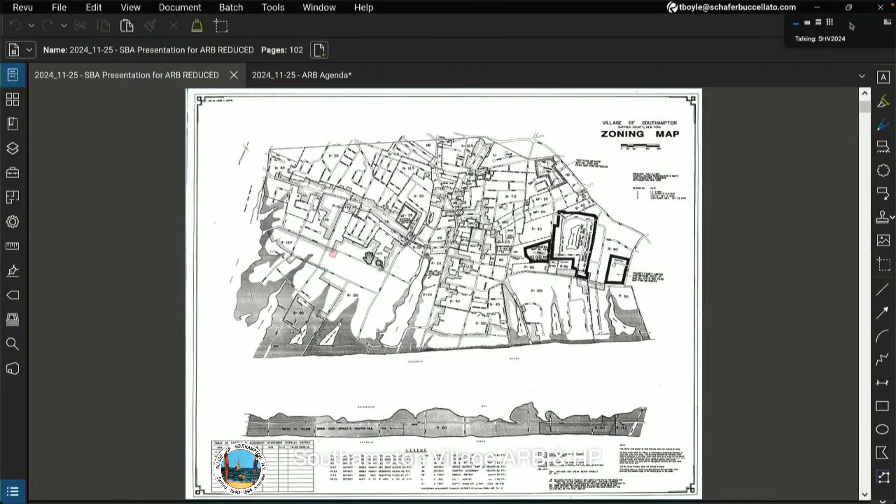So the existing home at 270 Ox Pasture Road is located within the Historic Estates section of the Village of Southampton and has been designated as a contributing resource in the Southampton Village Historic District since 1988. The existing house was built around 1910 as part of Southampton's early summer colony development.

The original 4-acre property was subsequently subdivided by a subsequent owner, shortening the depth of the property at the rear side. And that can also be seen in subsequent aerial mapping in 1960.

The home retains generous front and side yard setbacks, but as noted, the original parcel was subdivided, so it's now about 2.7 acres of the original 4. This was done sometime between 1932 and 1950, we think.

So the house now appears to sit toward the rear of the property, and consequently, there was a later kitchen addition or a previously altered kitchen area that actually straddles the amended rear side property setback.

And similarly, the existing non-conforming 2-car garage, which appeared in the survey of the property in 1950, as you can see here, that also partially falls outside the accessory building setback boundaries. So both of these elements represent pre-existing non-conforming conditions.

The house is described in the 1979 New York State Building Structure Inventory Blue Form as a 3-bay, 2.5-story hip roof Queen Anne house. And it maintains much of its architectural integrity, including asymmetrical massing, deep overhanging eaves and returns.

Variegated and decorative shingle siding and string courses that define each story, and multiple window types - all of these things are characteristic of the late Queen Anne Revival style.

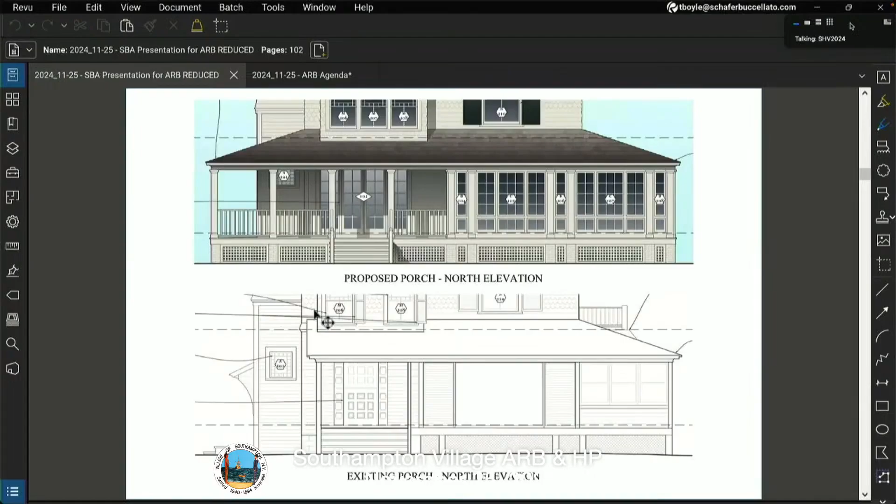We are also proposing to reduce the depth of the rear deck off the kitchen, and also the number of steps, as this deck will now connect to a slightly raised garden designed by Miranda Brooks, which we'll describe again later in the presentation.

So you can see both front and side. Here's the side. You can see at the bottom, that is the depth and the height of that existing deck off the kitchen. We're proposing to shorten it considerably and also eliminate a few of the steps by landing it on a raised garden.

I'm confused. So you're putting on an extension to the enclosed porch, is that correct? Yes, we are extending the enclosed portion of the porch.

Right. Do you want us to go back? Could you tell me, in relation to the already enclosed porch, what is it equal to? Let's say it's a bay and a half. So if you kind of lined up, is the below what's there now?

Yes, and this bay here on the right, which has the plate glass in the middle, projects from the face of the house. So in all, if we were to draw a straight line, the existing front porch across that bay, we're not extending, we're filling in and extending the house by a bit and just connecting that interior space. We feel like this solution is a little more visually coherent, and it affords them better visual access to the property.

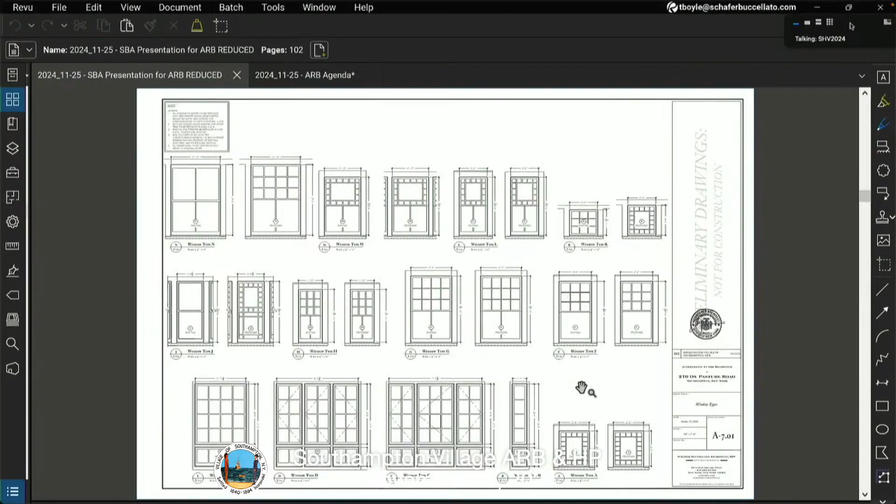So you can see from our drawings here where we have original windows and what we would propose in their place. Any one of these 3 strategies can be achieved by Riley, but we of course want the board's feedback to understand whether there are any that are immediately a disadvantage in your view.

Okay, we'll also show you a picture of a project that Riley Windows has completed recently. I think we trust that they know what they're doing. I don't think we need to look at windows from another project. The colored glass—yeah, we've figured out a strategy with them to achieve that.

Okay, and then, as with previous alterations to the house where original windows have been removed, moved, eliminated, or added, we are also proposing to add a new window at the projecting bay to match those that are flanking it.

So you can see below, the bay has 2 windows in the front. There are actually 2 windows on the side, so it's a bay of 4 windows with one kind of a blank in the middle. We thought to complete the bay, making it a 5-light bay, or 5-window bay, as we're showing on the top.

We're also proposing 2 new dormers, which would be in character with the existing dormers of the house. On the east side, that's the new dormer we're proposing on the 3rd floor to bring more light, and then that's at the 2nd floor on the south side.

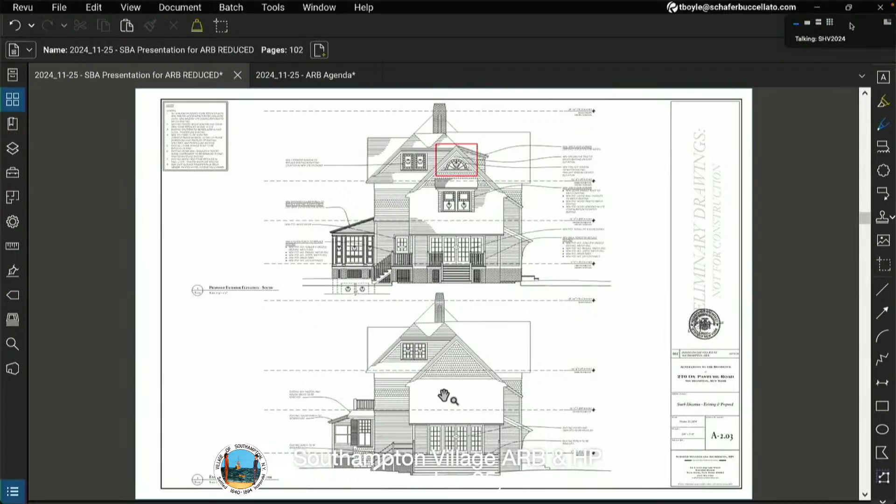Being in that garden and looking up at the house, you see new additions which are sensitive to the original. We've been working alongside Miranda Brooks Landscape Design as they develop the landscape, and although Miranda could not be with us tonight, she's provided us with the following points to share with the board. Their approach to the landscape was designed or guided by...

Before we go down that path, let's - you wanna talk about the house? I think you've got new structures and you've got a historic structure. Why don't we bifurcate that out for a minute? Let's just start with the existing structure. That sounds fine.

Board members need to - I will tell you one thing we're going to do is I'm gonna ask Zach to take a look at the house and tell us what he might know about it, just because it's a 1910 house and you're in a historic district. But board members...

It's an awful lot to take in. I wanna say thank you for not trying to demolish the house or change it greatly, but I would hope that you would use whatever is there. I think sometimes the original windows can be used. So where we can, we need to make sure we can achieve the impact rating. And if we can achieve that through rated storm windows applied during storms or seasonally, I think we need a good understanding of how we can achieve the energy efficiency as well, so you're not behind a storm panel all year round. But you're right, we would want to maintain as many of those original windows as we can, while also meeting the demands of the building codes. But I appreciate that would be our goal as well.

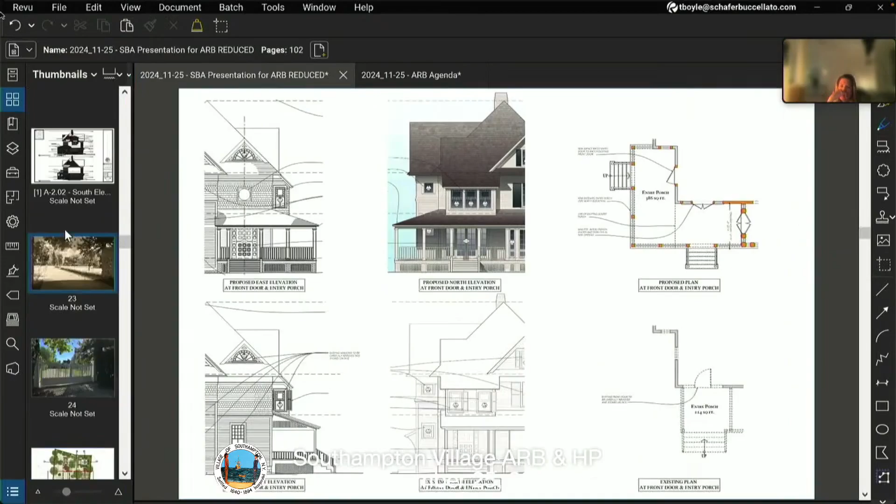So what you'll see from the site plan is that the existing driveway, the driveway opening, apron, and gate are all going to remain, and the existing driveway will also remain. This brings you to the house on the west side. Currently there's a circular drive around a tree, and you come to the north side of the house. So what Miranda is proposing is to bring you along the west side of the house, so it makes sense, at least in our mind, in tying those two ideas together, to enter the house from the east. The glass doors that you see in the position of the original front door are leading to an enclosed hedge garden.

So we're creating some connection between the house and the north. One of the challenges with the side setbacks of this property, having been foreshortened, is that most of the property is to the north. So wanting to take best advantage of those views and the connection from inside the house to the outside on the north is important. It's one of the reasons why we've tried to improve the enclosed porch to the north.

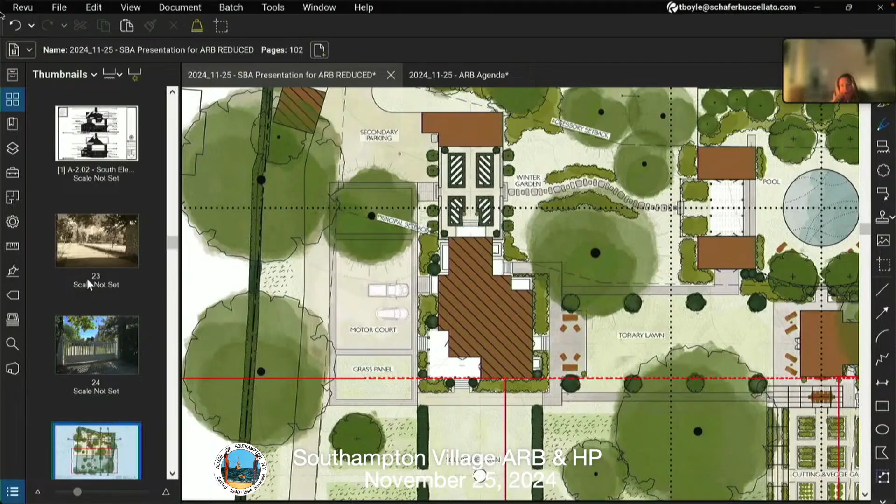As I said, we can just go to the approach here. So the driveway apron and the automatic gate are going to be maintained.

Sorry, it's catching up here. This is again the view of the proposed design. This is the existing gate, and that will remain, and this is the view from the driveway apron.

The driveway again leads to a new motor court flanked by lawn panels, creating a new primary entrance sequence, which is associated with this relocated front door. And then the drive continues to the south.

Let me just go to the site plan. So there's the new receiving area with the flanking lawn panels, but the driveway continues to the south. You can see in the upper left, there's the existing two-car garage, so there's a service court now nestled in the back.

And we're proposing to refurbish if we can. This garage building is in not great condition. We'll refurbish it as much as we can in its footprint, or if we have to, reconstruct it—you'll see elevations of that in a bit.

Tucked behind the existing house is an art studio and maker space, which will be connected to the house by a raised winter garden, which you can see with the parterres there. Pleached trees are going to create a living screen between the garden and that service court, connected by this meandering path.

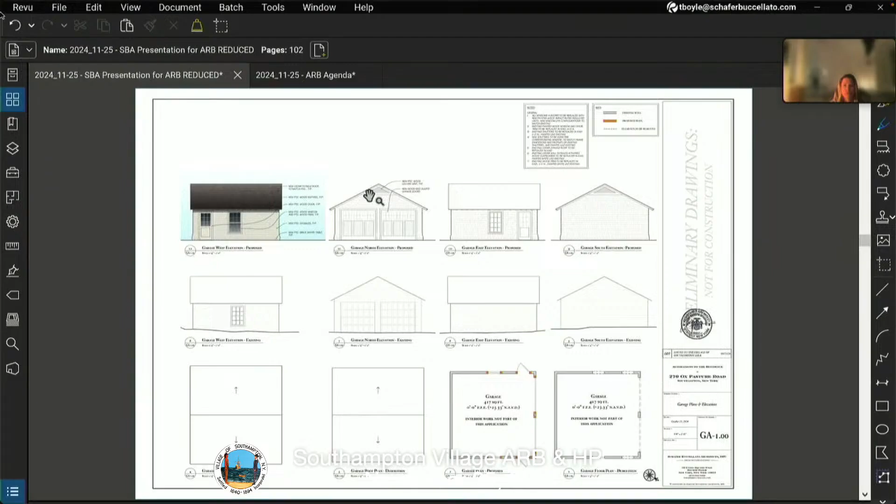And then the art studio is next. Okay, and then we have the gym and the spa. Let's take us through the art studio. Sure, so this one will have shingled siding that will be painted to match the house.

So these two structures, because they're so close together, want to feel made of like materials and finished in like ways. We have double hung windows that are operable on the north and south sides, and also on the west side, and an entry door off of that service court.

And the roof pitches here, I think, are 10 in 12. The main house is 12 in 12, with the Victorian steeper pitch. Here we kept under the 16-foot height limitation and still have a pitched roof. We did the best we could.

And then the gym building, which has a twin, the spa building—these buildings will also be shingle-sided, with natural wood roof material to match the main house. But at this point, we think these two buildings, and also the Folly, are going to be stained or left to weather, so not painted. The brick water table at all of these structures—the gym, the spa, and the Folly—will probably be left unpainted, unfinished. That's the idea at this time, although the art studio will have materials that are again in keeping with the main house.

If you recall, you all approved our plan about a year ago or so. I'm happy to report that the significant upgrades to materials are moving along swimmingly. We replaced all those non-functional windows with new casement windows, and we happily removed that poor quality EIFS, that foam, and have used very beautiful stucco. The front of the house is moving along swimmingly.

In the back, we have two small changes, as happens with existing conditions. Carol Vinci, our architect, can go through it, but we found two things that we'd like to change in the back. Okay, if you'll just take us through them, that would be great.

I'm Carol DeSico Vinci, V-I-N-C-I. As we began working, as with all renovations, we noticed some existing conditions that we wanted to revisit. There's no changes to the front facade, this is the rear facade. We would like to add a second window and combine it with one window that was approved. This is in the area of a stair landing on the second floor. What we realized when we began work was that we really minimized the view to this beautiful rear yard.

I included in the submission for this modification a color Xerox of the old rear facade, so you can see that we took away a view that we had previously, and we didn't intend to do that. So on the second floor, above the French doors that lead out to the rear yard, from the stair hall, instead of one pair of French casements, it's two pairs of French casements. That gives us the view back.

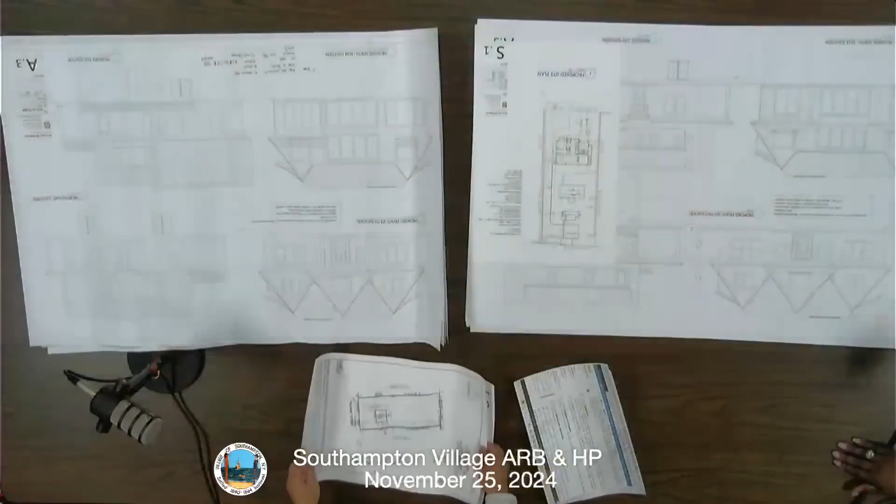So we had a previous meeting, and since then we heard what the board said and made quite a bit of changes. Starting from the back where the windows and doors are, you can see this is a lot of glass, and we did a lot of reductions. We reduced about 130 square feet of glass, so it's like a 25% decrease of the glass area.

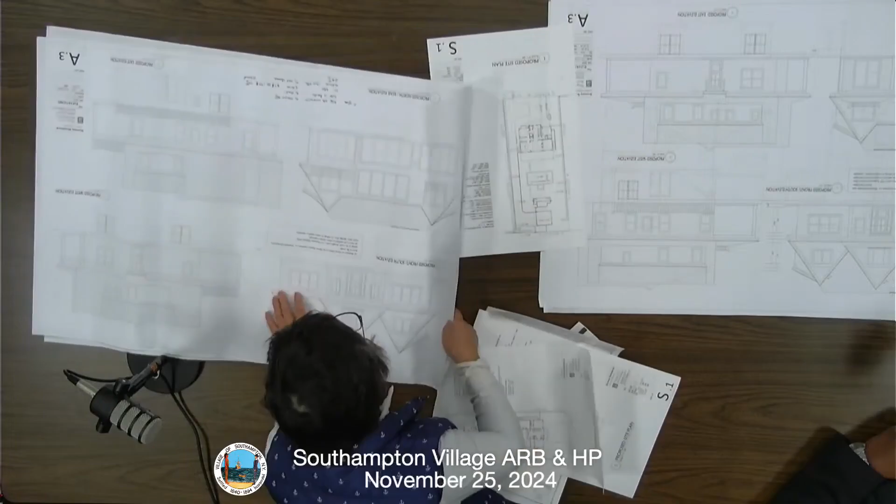That will be the number one thing we did. Number two, the roof line - I think the board was saying there's too much curve, so we turned them into straight lines. And then the columns, instead of 4, we did 2. There's also the square footage reduction of the balcony.

So the balcony right now is all different. Instead of a large balcony, we had them recessed into two smaller ones instead of one large balcony. It's probably easier to see it on the floor plan.

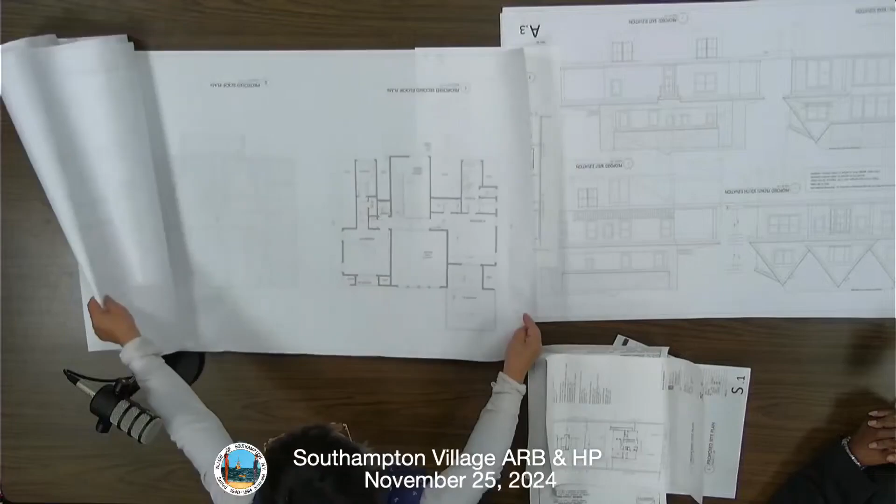And the floor plan would be - this was the original, it's a very large balcony, and then we had a small balcony. You see a tiny little one - 4'7" by 8 foot, 4'9" by 8'7" balcony.

And then we have also changed - sorry, I wrote it upside down - that's about it. Oh, the dentil, we removed the dentil, yes. The front gable, they're gone. Board members, that's the changes we made.

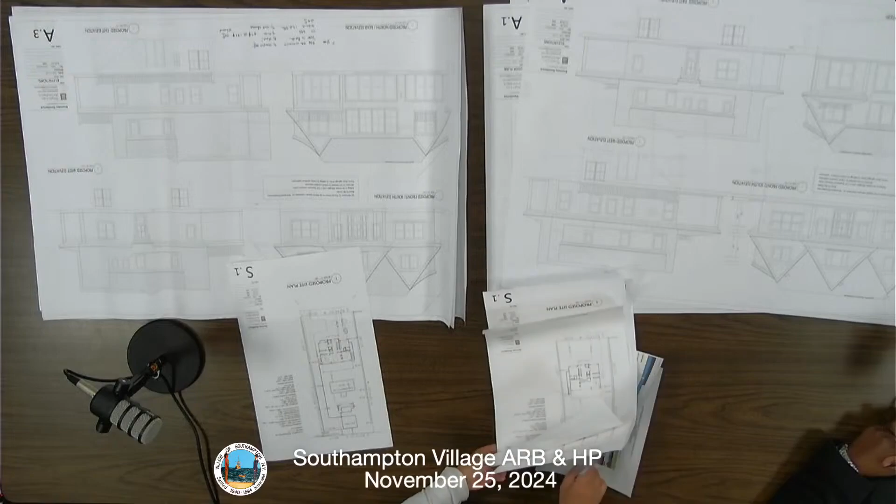Jane? Definitely seems improved. The removal of the dentil, I think, makes it that much more simplistic.

Need any comments? Seems a little... good, repetitive, something cookie cutter. If you look at the original style, there's more variation, I would think, in the proportions and the rhythm of the facade. But I agree that it's improved without the extra decorative dentil.

Susan? I think it's improved. I feel like I've seen this house in the village too many times now though. It seems that this is like standard fare, but I don't know. And it doesn't really relate to the neighborhood, but I guess the neighborhood is changing, so that was my major concern actually. I like the neighborhood, I like how it looks. Okay, and you?

My comment would be, I think when they put it before us last time, they addressed literally every one of the concerns that we put out about the house. Okay. And I think it sits nice in its spot.

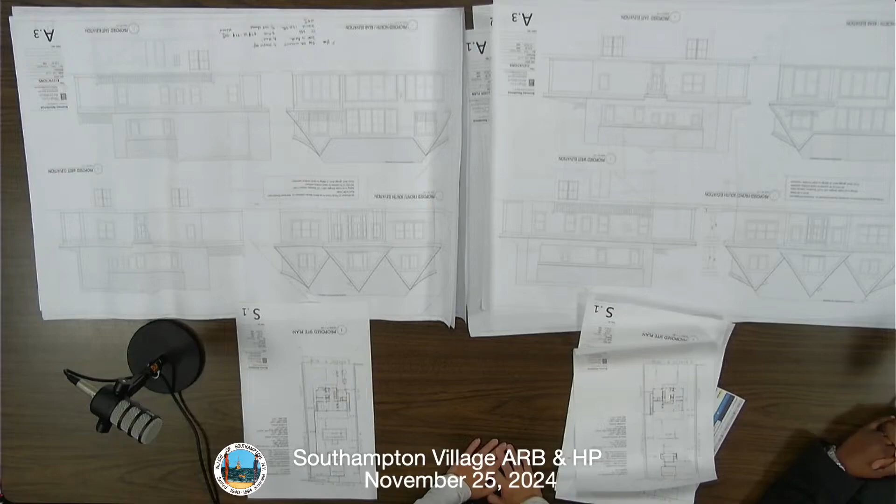Nina? She put her hand up. I'm a nay. Does the record reflect that she voted aye? Aye, okay. Against? You're a nay? Yep, okay, you guys are voting.

And thank you for coming. We like to see homeowners. How long ago was that, a year ago? No, no, the first set of drawings, that's on the drawing date, mid-June. Well, it was 4/21, then 6/6, and then 11/16. So you've had some time there, that's a long time ago. Oh, we filed it in March, but we didn't do the first meeting until June.

Right, okay. Next up is 16 Willis Street for demolition evaluation of existing dwelling. Oh, was that the one we just approved? No, but we just approved it. Yeah, we approved it. Hi.

Hi. Can you introduce yourself and spell your last name, please? My name's Nicole Adams, A-D-A-M-S. I am the architect and agent for 16 Willis Street.

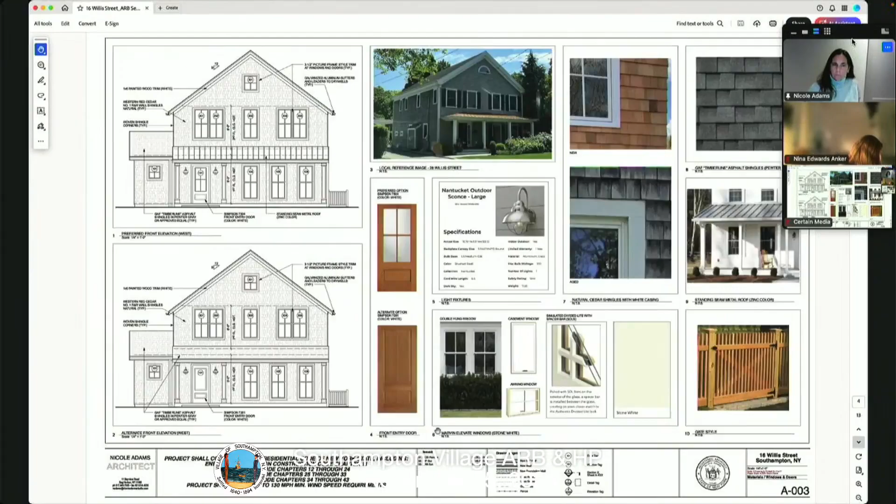Here's what I think: reordering the door to the front and breaking up the completely straight rhythm across the front of the house makes a huge difference, and I think it's more in keeping with what's harmonious to houses you see on the street in Southampton. The two bathroom windows increase your window-to-wall ratio, because it was severely under-fenestrated on that south elevation, so adding those two windows actually improves the house from that perspective. I would agree.

I think what I'm hearing is that the board has a universal love of the asphalt option across the front of the house. So, back to you. We'll take comments from the public. So we're happy to move forward with the asphalt and the windows.

Okay, are there any comments from the public? Oh my God, it's...

Okay, so then I'm going to motion to approve the application for 16 Willis Street based on the drawings stamped into the village November 15, 2024. Is there a second? Second.

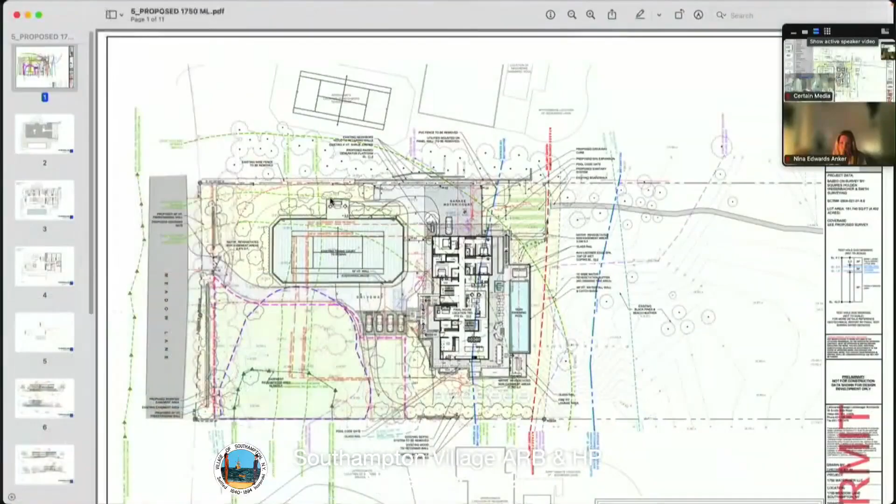Sure, okay, so you want to just bring up the first pages of the presentation. As I mentioned, we're an architectural firm based in Bridgehampton for many years, specializing in waterfront homes. In the last 25 years, we've received more than 60 AIA design awards and have numerous publications. We take our design work very seriously, and I feel like we have an excellent reputation in doing so. The original application, we were in front of the ZBA board for over 2 years, and then working with the ZBA, we ultimately received unanimous approval.

The proposed house, as John mentioned, is approximately almost 200 feet from Meadow Lane, and we're about 360 feet to the crest of the dunes. Then there's another 300 feet from the crest of the dunes to the mean high water mark at the beach, so it's a very long lot. I think as I mentioned, we received letters of support from both neighbors throughout the application process.

I think the merits of the site plan, just to talk a little bit about the site, I know that's less in your purview than the architecture, but the site currently consists of what was determined from all the consultants as a very low-quality wetland, basically a low spot. So the owner's working with the board. LaGuardia Landscape Design has significantly expanded a landscape buffer in the front. The entire property is going to be re-landscaped with native vegetation, but LaGuardia Design worked very closely with the village consultants and other wetland consultants, so those discussions noted that this was a model application in the village for having no irrigated lawn, whereas there currently exists a substantial amount of lawn on the property.

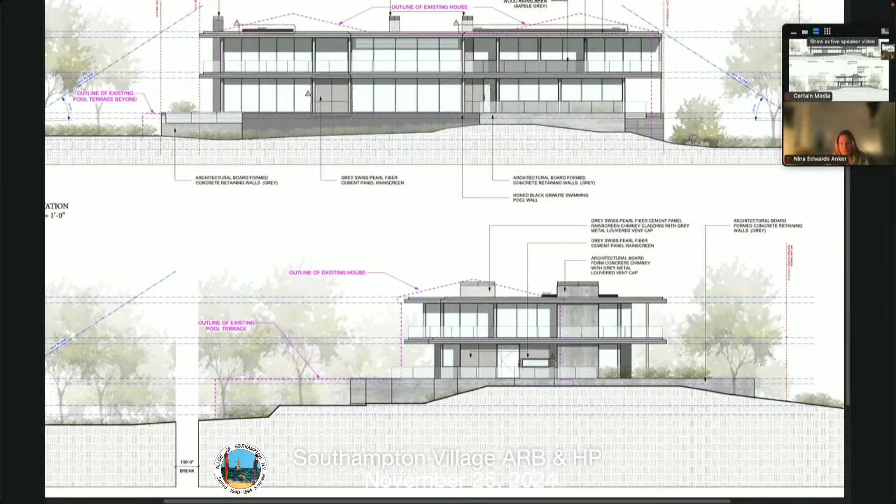There was also discussion going up to the roof plan about the amount of skylight that was potentially visible, and it actually shows up. We revised all of our renderings to show that. So we eliminated a skylight that came down across the hall to the living room.

So we eliminated that whole section of skylight. It's about 50 linear feet by about 5 feet wide of skylight that was coming down, and there was a comment that it may be visible from the front of the house, at least if you're in the front yard. So we eliminated that.

There still is the skylight. The house is a double-loaded corridor with bedrooms on each side. So we kept a portion of the skylight there, but it's actually not visible from the street because it's in a corridor. When you look at the plan, you have a series of bedrooms on both sides.

And that's actually the extent of the changes there. We revised the renderings, and we included some night renderings that Frank can bring up on the screen.

The material palette is the same: we're using weathered Sapele mahogany, FSC certified, which will weather to a natural gray, and a cement panel which is very high quality—not like some other more industrial ones out there. This is called Swisspearl, a very durable, low-maintenance matte gray panel.

For the pavers, we're proposing Madras gray limestone pavers, a light, innocuous gray. And for the sides of the planters as you enter the house, we're using a textured board form, which has a relief, still a neutral gray, but with the relief of the board within the form.

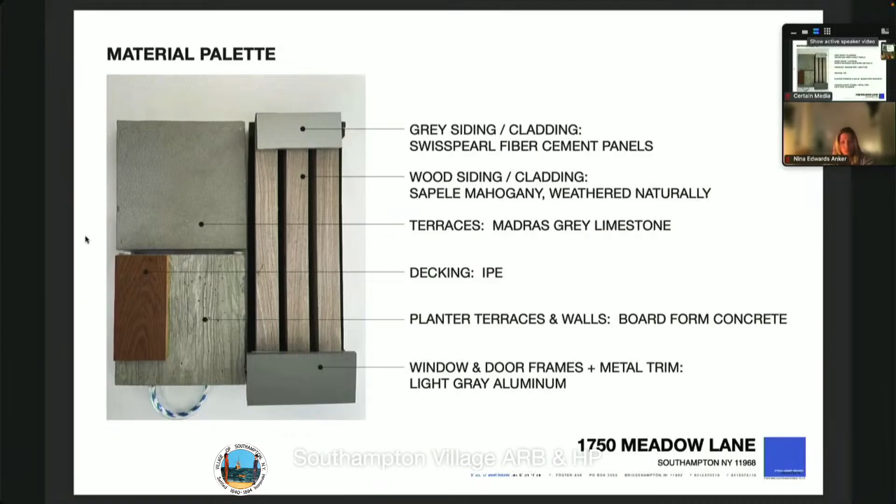We revised the renderings to show these changes, and we included some night renderings per the request of the board at the last meeting. Yes, I see. Thank you.

As you see from the bottom rendering, that's taken from approximately the mean high water, a little above that—it's a bit lower when you're down there, but that's basically the foot of the first dune. So the entire first floor pool area, everything at ground level, even after it's elevated per FEMA requirements, is not visible.

If you want to go to the next one. From the street, one thing we mentioned before—that left view—is once you come in the driveway, it curves around this revegetated native landscape. So going down Meadow Lane, you won't actually be looking down the driveway; it'll be screened by a native vegetated grove. That's taken right inside the driveway.

And I mentioned before about the materials. We're proposing a very high performance glass called SN68, which has a light transmittance of 70, so it's a 30% reduction over clear glass.

In terms of environmental components, we're proposing a closed loop geothermal system. There'll be 25 kilowatts of solar power on the roof—that'll be flat, so it won't be visible. There's also a high performance insulation package and a high performance glass package, as I mentioned.

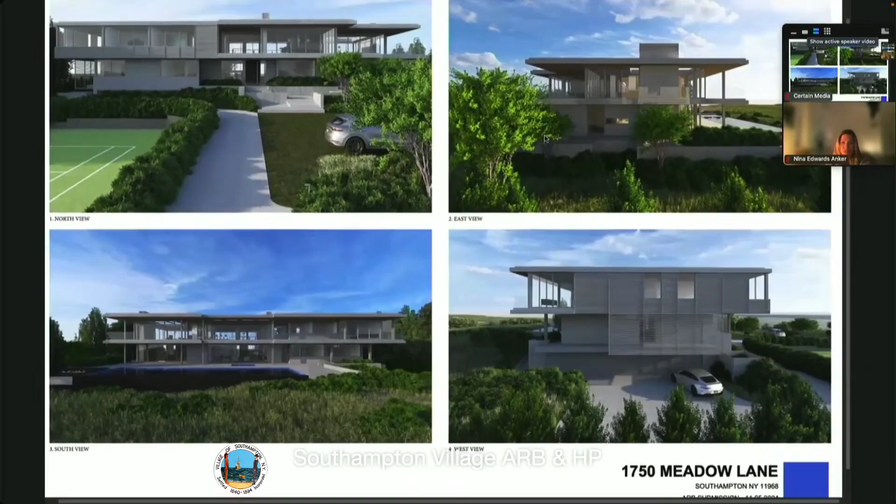We're also proposing wood ceilings, which we thought, in addition to cutting down light transmittance through the glass, would reduce any reflectivity. Yep, they'll absorb it—that'd be great.

Nina, let's start with you. Can you go back to the daytime, the elevations, the front? To 2D elevations.

I think it's improved in terms of the rendering. There was one that I feel is greatly improved. I think you made it more like a half, so it seems like it's more broken up into the two volumes in the north view.

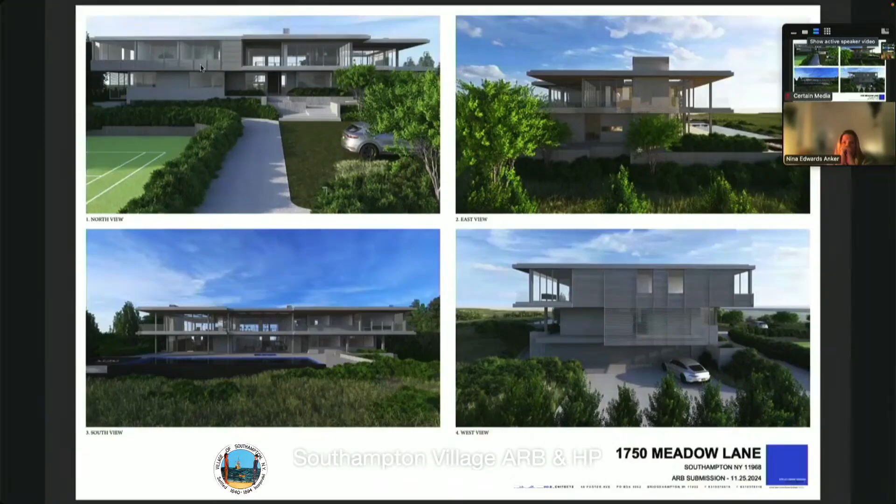Let's get there for you. And I think the east and the west views I've always found those fine. The view facing the beach to the south still seems massive, and not broken up. We see so many of those along the beach, these big glass boxes, rectangles.

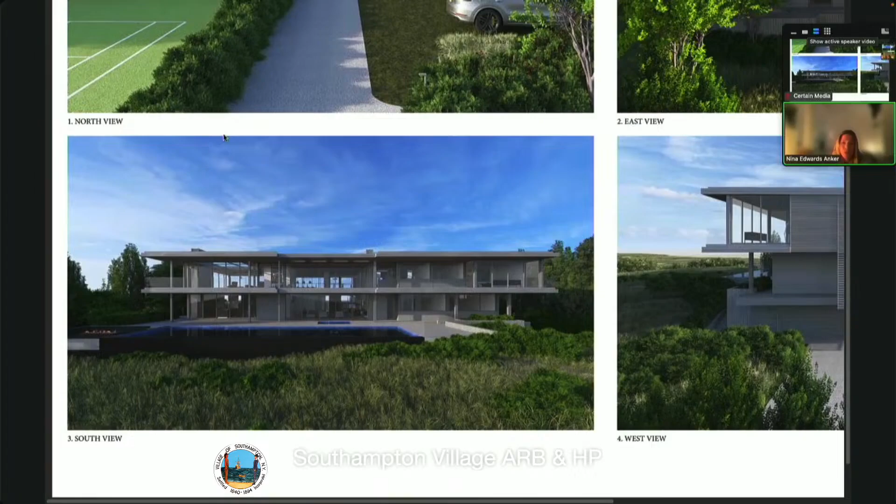What you've done in the north facade, that works. It seems it's got rhythm and it's got variety. I think from an energy perspective, glass facing south is good, but I think it's just too much glass right on the beach and not broken up enough. Volume is just massive. Maybe you could bring some of what you did on the north facade into the south.

Susan? I don't have anything to say right now.

Okay, Jane? I'll say a definite improvement, not having the glass front doors and side door. It does still seem to have a great amount of ratio of glass to wall on the south side. Can you blow that up, can I get it more centered on that back, on the south side there? That's it. Can you go in a bit closer? Thank you. So where is that, is there any attempt to break it up?

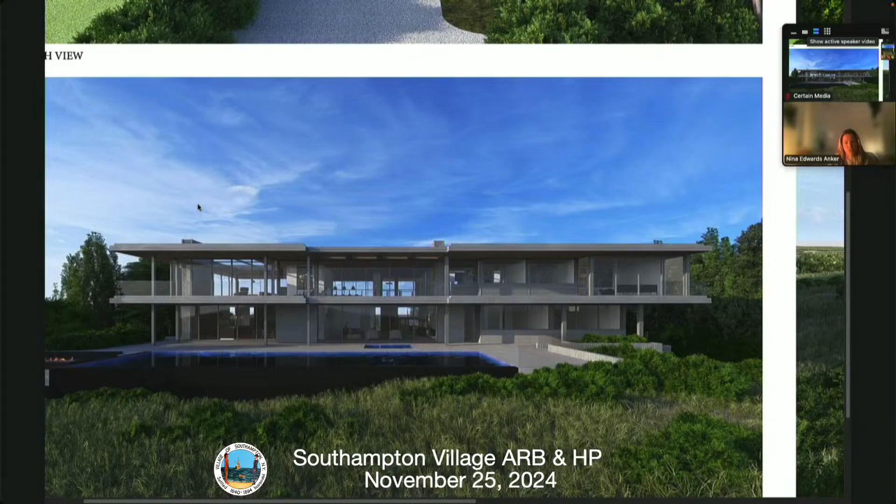Well, I think that the panel between, the solid panel between the kitchen and the living room, which is at the lower left part of the screen. Yeah, I see that. And then there's all of the bedrooms on the right side that actually have a low wall. I don't know if you could see that, but there's a low knee wall in all of the bedrooms facing south on the right side, and there's a low knee wall in the bedrooms above.

And we intentionally, in terms of the energy for the south side, made the overhangs very deep on the south side, on both the lower and the upper floor. So part of that was to, once again, as John mentioned, push the glass back and then have a lightness to it, and also cut down any light reflectivity as a result of that.

But I think when you look at the site section that we included in our presentation, that this view is seen from the backyard, that the dunes go up to elevation 16. So this is actually tucked into a lower part of the site. The crest of the dunes goes up to elevation 16, about 350 feet away. So that's why we took the renderings from front and from further back.

And in terms of breaking up the scale of it, our take is that trying to keep things calm goes a long way for modern architecture to kind of sit. The landscape is going to grow in. There's a substantial effort to revegetate the site. So keeping things calm, at least in my opinion, actually helps the building sort of set in the landscape, as opposed to arbitrarily breaking it up into multiple volumes and having a lot more interesting things going on.

I'm more interested in the actual light pollution. I'm not arguing with your design, and I hear that it's set back, but when I look at it, it's all glass. One thing also is dunes do come and go according to what happens. Right now we have a lot of beach down there on Meadow, but we don't always, and so right now it's a very, very limited view from the beach. But that may not always be the way.

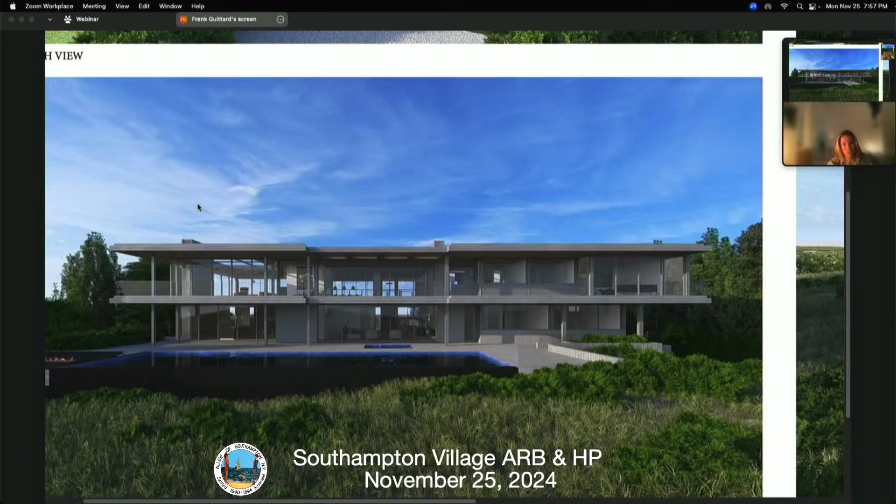Here's where I think we're netting it out: on your north elevations, the street-facing elevations, the changes you've made are very well appreciated. What you're not getting support for right now is the south elevation, because there's literally no walls — it's almost 100% glass across the back of that house. So if you could take the energy you put toward the north elevation changes and bring down the amount of glass exposure on the back, we'd probably be in a good place.

That sounds like a good strategy, but the north side of the house faces the street and the south side faces the beach, which is why the owner purchased this property. What I'm telling you is, what I'm hearing from the people who have to vote to approve this, is that you're not getting support for the amount of glass across the south elevation. They'd like to see a little bit less glass on the back of the house, and that's what I'm hearing.

Okay, as part of the next presentation, since it's obviously not going forward this time, we'll show you the percentage-wise amount of glass that has been freely given on houses in this area, including houses approved by the board as constituted. There have been no code changes, and it would be inconsistent to hold this applicant to a higher and different standard. But we'll come back and demonstrate that to you.

All right, do we have any comments from the public? Don't forget that both neighbors are in support of this application. Please go ahead.

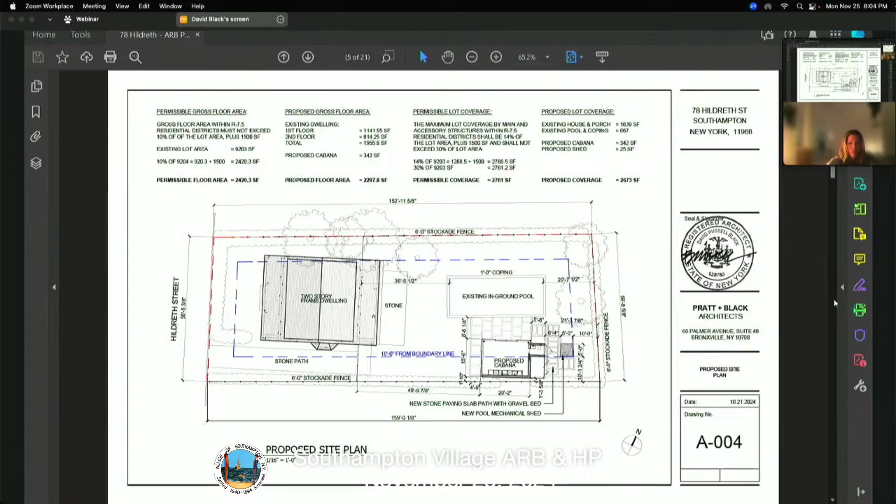All right, so what you're proposing is a big glass box. Yeah, okay, just what we were talking about. Right, so I did go back there, it's in the rear yard. There's a small view corridor where you can see the structure, but it's not very visible from the street.

So the existing single-story garage was used just for storage and for the pool equipment room. Now they want to make it into just a single room, the exact same size as the existing garage plus the pool equipment, literally one big room with a countertop, no cooking equipment. Then the addition of the powder room complies with all the setbacks, and it is being done in addition to the garage. And then there's an outdoor shower.

And because the pool shed, okay, because this is a pre-existing non-conforming structure and the current existing garage, you're not adding anything dimensionally outside what is currently there, right? We are adding something that is within the allowable setback for a cabana.

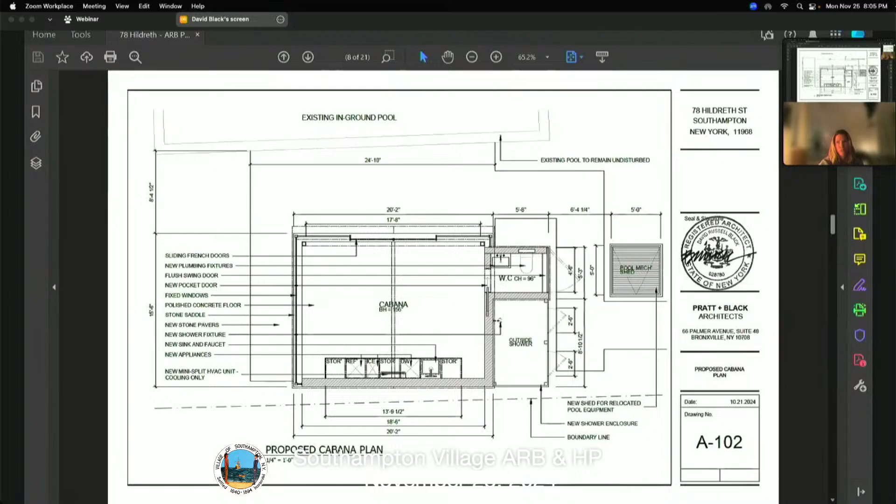So the addition of this little powder room is setback-wise off of the property line to adhere to that restriction. The new addition, this powder room, would be compliant with all the new setbacks. So you're in setbacks, 10 feet to the accessory boundary for where you're pushing out for the bathroom. Correct. So we're not increasing the non-compliance.

Okay, so far we have an all-metal roof and an all-glass building. Yes. Here are the materials, existing garage, and I'll go to the beautiful renderings. Yes, an all-glass structure with glass sliding doors. And then the new pool shed and the powder room are wood siding.

And the roof is standing seam in gray matte? Yes. Okay, well, do you have a sample of it? Not a physical sample with us.

So there's standing seam, and then there's standing seam in my head, because some of it's much grosser and sort of intense, industrial looking. This wouldn't be the industrial looking kind. This would be the high quality, I hope residential looking kind. Well, let's drive around, you can see the other thing.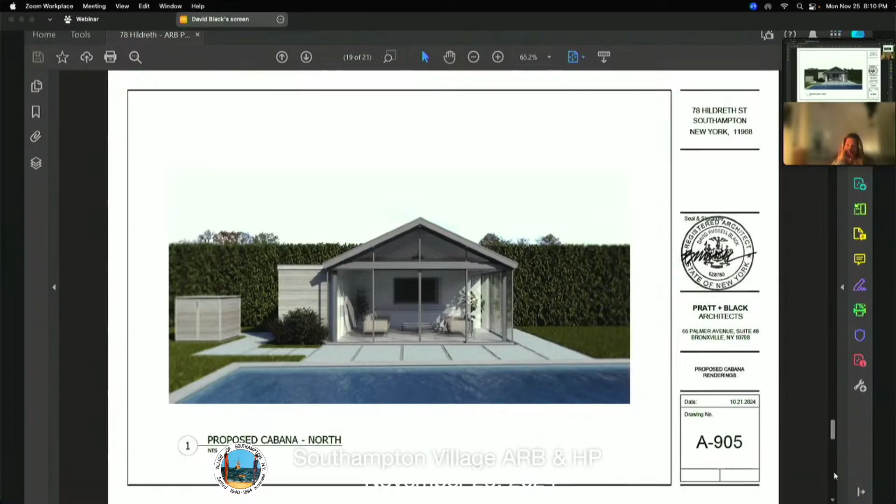My name is Robert Essay. I've served 10 years on the Architectural Review Board and 10 years on the Planning Commission. I also lived on that street. I have no objection about the garage being converted to a pool house, but that house was a 3-bedroom house. If I remember correctly, the village code requires a 3-bedroom house to have 4 parking spaces. If you look at that yard now, they only have 2.

They've shortened the driveway, and they're doing that throughout the whole village. In the summertime, when you try to go down that street with off-road parking on both sides, you could not get through with a fire truck. So if they're going to start converting these garages to pool houses, they're going to have to figure out how to add parking to the area. That's my main objection.

Okay, I'm gonna throw that to Alex. So a 3-bedroom house requires 2 parking spaces—is that what this has to provide? The driveway, I walked down it. Does it fit 2 cars? It's definitely long enough for 2 cars.

Okay, 2 cars is all that could be stacked. I understand that. So with or without this building serving as a garage, they would have 2 parking spaces. They already weren't using it as a garage—that was obvious when I went down there, being the building detective that I am.

It's so annoying. Okay, well, I think according to village code—because the site plan is signed off, it's not really in front of us, but you're right—they need to have 2 parking spaces, which is required for the 3-bedroom house. And it has to be on-site parking, it doesn't need to be garage parking. But apparently they haven't been using this garage for parking, and there apparently is parking on site, which is why the building department actually signed off on it as approved for parking from a parking perspective.

What's the motion here? Basically, what you're hearing is you're not hearing objections from the board, but now we're gonna have to leave it open so the public can make comments. Oh, okay, so you're gonna have to renotice. You can adjourn it pending renotice. Okay, the 11/9 notice is already in the paper, so if we have to put it back in the paper, it would have to be for the following meeting. You mean the 12th? I'm sorry, 12/9, yes.

So it'd have to be for January, the 13th? What's 14 days, the 13th? Yep, okay. So motion to adjourn the application for 57 First Neck for renotice and posting, adjourn to January 13th. Is that correct? 2025. Is there a second? Second, all in favor? Great, thank you.

All right, so that brings us to 90 Murray Lane. Do you have affidavits and are they in order? Yes, I do.

We have a hand up on the Zoom meeting. Is this for the previous application? No, for 90 Murray. Okay.

Yep, I'm here, can you guys hear me? Hi everybody, my name's Tanner White, I'm the architect for 90 Murray Lane. I'm joined by the homeowner Philip Guerin and the landscape architect Genna Kupinska. The homeowner just wanted to make a brief introduction before I make my presentation.

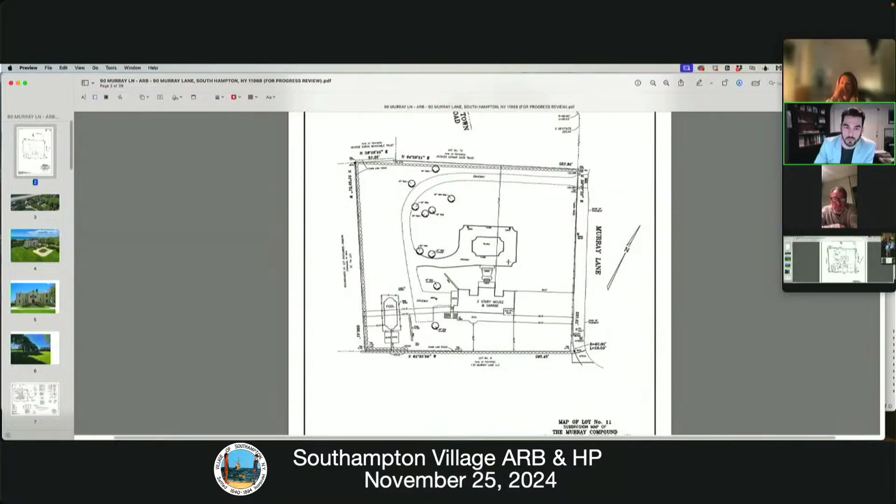So this is the existing site plan here, and obviously we're going to remove the 2-story house, garage, and pool, and build in its place a new single-family home, plus a detached garage and accessory structure.

So this is the new proposed site plan. Coming in from the same spot as the current driveway, we go to a simple parking court, continue on to the detached garage, where you then go through a covered walkway to get to the main house.

There are two accessory detached structures here in the pool area: a proposed one-story pool house and a proposed covered patio. Just to orient you, this is Murray Lane right here, the water is right here, and we're one row back from the beach.

So this is the photorealistic rendering of what we're proposing tonight. It's a combination of stained cedar shingles, painted trim, charcoal windows, natural cedar roof, and a brick chimney. This is the detached garage I was talking about, the covered pathway here, and this would be your front entrance over here.

This is the front, so as you can see, there are some shed dormers and some one-story elements here, which break up the mass in an architecturally interesting way that we tied to this covered pathway. Then we wrap it around in the back, where it's a little more clean and open, obviously, to the views.

So this is the rear. There's, again, the detached garage right there. It's covered by this fascia that wraps, or really the frieze, across the middle of the house, integrating the covered porches and overhangs up into the balconies on the second floor.

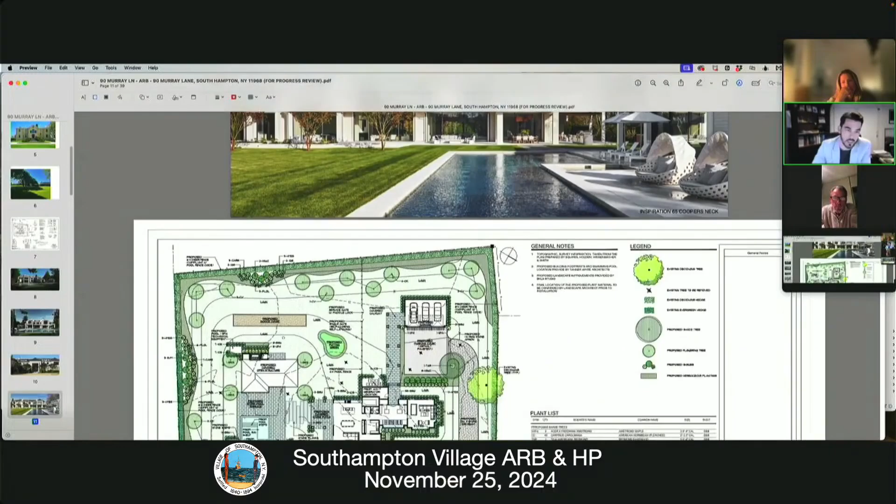As I mentioned, I'm also here with Genna Kupinska, the landscape architect. I'm going to keep going and then circle back so she can present her concept, because there are just a few more slides to get through.

This is going to include the gate as well as the planting list. Something noteworthy is that 90 Murray is a dead-end street—this is a picture taken looking back towards the house, and as you can see, you'll really only be seeing the top of the roof and the chimneys. So all of the elements on the first and second floor will really be shielded by the proposed landscape plan.

The rest of the architectural drawings are less visual floor plans, which I'm happy to go through. Nope, they're not, as well. Interiors are not in our purview, please—we just look at the exterior.

I'm just glancing through them, and then at the end, the architectural 2D elevations show the sky plane and basically the two-dimensional representation of the house. As you can see here, everything's called out between the painted trim, the painted white dove trim, the stained shingles, the natural cedar roof, the charcoal windows, brick chimneys, and flat square columns wrapping throughout the house.

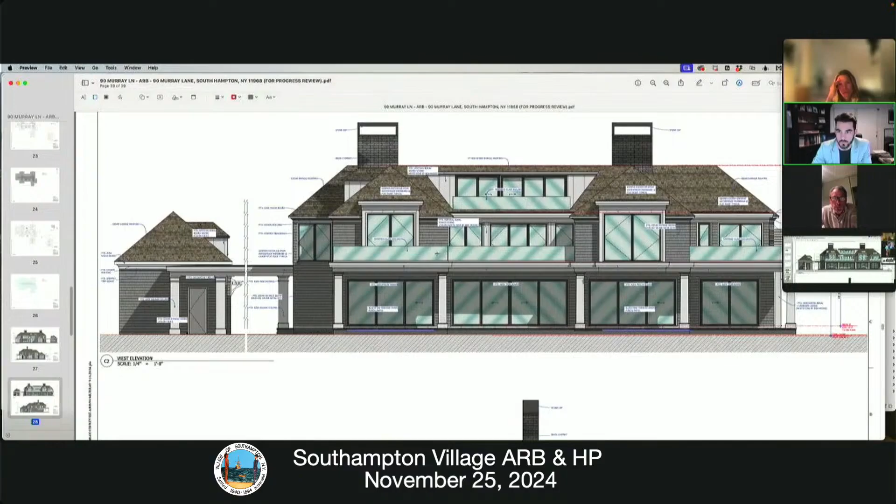This is the south elevation, and this would be the west elevation. Then last but not least, the north elevation, which cuts through that one-story loggia, or covered walkway, connecting the house to the garage.

These are some less photorealistic but more descriptive axonometrics, or perspectives I should say, of the proposed house. Here's some bird's eye views, and basically a fly-around of the house and all of the detached structures. Moving right along to the detached structures, this is just basically an open pavilion—nothing more than a couple of square columns, a brick chimney, and a pitched cedar roof.

Referencing Cooper's Neck, we also designed a modern pool house, a one-story, 10-foot high contrasting modern element similar to that house, with a gym and a bathroom inside. It's just a series of sliding doors on a one-story flat roof surrounded by landscaping. Here are more images of that structure, and more images of the covered patio.

This is a wall section, and this is your street view showing the sky plane, and the rest are architectural sections. I'm going to pass it on to Jenna, who's going to raise her hand as well, and she can go through the landscape plan, and of course any questions you guys have, I'm here to answer as well. Jenna, are you here?

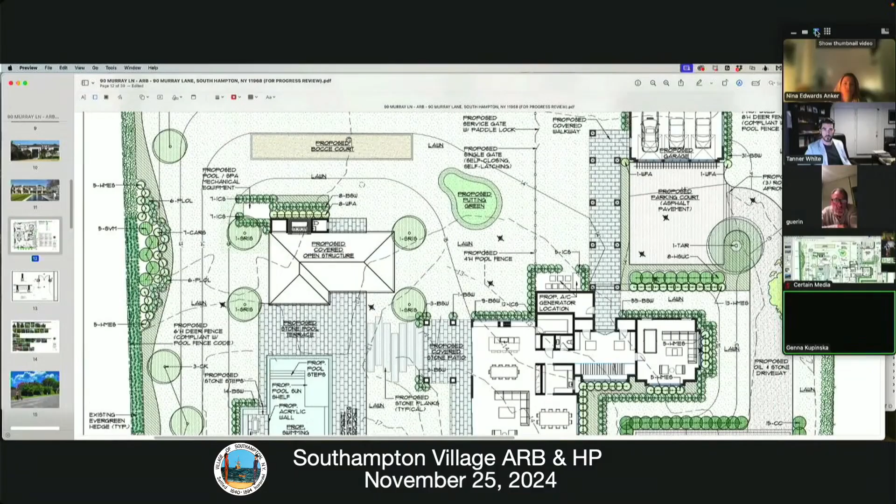A few requests that the clients had were for a spot for a small putting green and a bocce court, which right now are proposed to be behind the covered structure. Okay, thank you.

Okay, board members. I'm not sure if you mentioned the trees—I didn't hear everything you were saying. There are very mature trees on the property. Are those remaining? That's exactly right.

This is a remaining linden tree. The rest of the trees that are there, unfortunately, would need to come down because of the new house construction. They also have a lot of V-shaped branches, which over time, even if the tree remains, may create danger for any structures on the property because the branches are quite unstable and weak.

And may be broken by heavy winds. So the four mature trees in the driveway, are you planning on taking them down? No, I'm sorry—the tree in light green is the existing tree that will remain. The trees along the driveway, between the entry to the property and the entry court, are new trees, a variety of native red maples. Those are new trees, not existing.

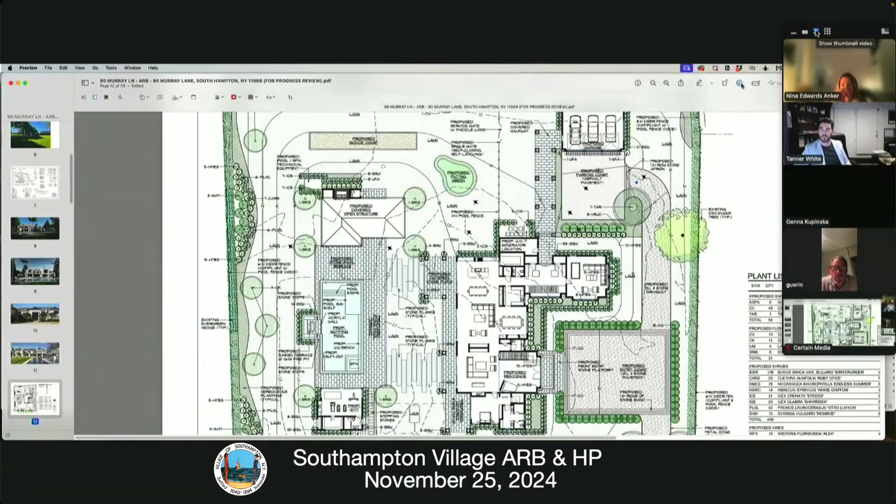Right, so the one tree they're keeping is that historic big tree by the driveway. The ones marked with X's are the existing trees that will be taken down. Okay, all right, well let's talk about the house.

I had a question—you mentioned something about brick not being portrayed, and I wasn't sure where that was supposed to be. Back to the architect about the house: at the time we had this rendering, there were a couple of back-and-forths with the town, and one was to change the stone rendering from this fieldstone look to brick.

So we've done that, and that's what's in our official application in terms of all the architectural two-dimensional elevations—as you can see, it's called out as brick chimney. It's just on these photorealistic renderings.

It looks like it's stone. We're not proposing a fieldstone veneer. Okay, I wasn't sure what that was, so I wanted clarification on that. The ratio of your glass to your wall, especially on the ocean-facing side, seems excessive.

And we're usually not very fond of the charcoal windows. You probably don't have the sample since you're on Zoom, but how dark is the charcoal for the trim on the windows? Dark.

But like I said, the color palette is the same as this house, which is 65 Cooper's Neck. Okay, we're working on your house, not Cooper's Neck. No, I know, I'm sorry. I just felt it was helpful.

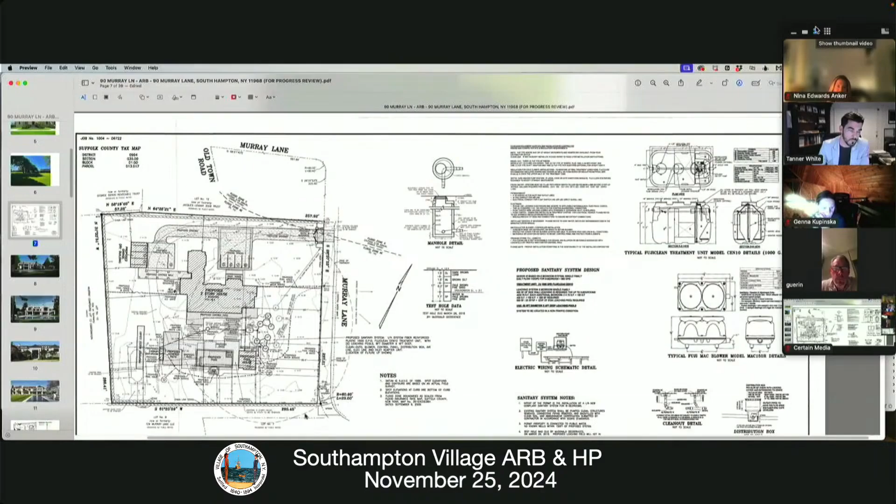The other thing I'm thinking about is when we look at the west elevation, the way this property sits, it sits very close to the ocean on the south side, and over that hedge are two houses that this house actually faces in the back, that are fairly close to the property line. And then you've got all this glass sliding up facing those two neighbors just over a hedge line, but then with this third floor balcony with all the sliding glass windows, they look straight down into the yards of the two neighbors between you and the ocean.

When we look at the glazing patterns on this thing, look at your muntin pattern on the east elevation, it has absolutely no relationship to the muntin pattern on your west elevation. Your north seems to match, but on the south, muntin patterns seem to match, and that huge side-facing commercial-looking window, I don't know if it's a stairwell because I didn't look at the interior, but it's all just far too much. The windows barely have a frieze board because your windows go almost up to the eave line on the house. It's just all too much.

The overall shape of the house is actually hard to judge because the first thing you're looking at is the glass. The two chimneys seem a little large and out of scale to the size of the house, because they're very wide and very tall in your drawings. When you come back to us, your drawings will need to match your renderings, one matched set that all look alike. But I don't think you're going to find any support anywhere for the amount of glass and the window to wall ratio you have on this house.

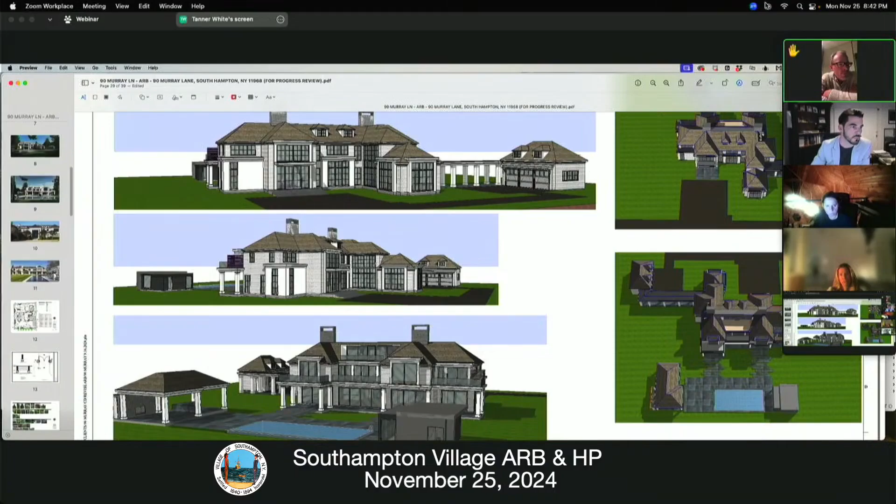Look, I would say a couple things. One, I have 15-foot privet around my entire property, and literally don't see anyone. 134 Murray that was just built has a flag driveway into my yard. They recently put up 20-foot trees down the entire driveway, which, by the way, I'm not actually even complaining about, because my view is he spent on his property. I'm not that type of neighbor. But to spend the money I did on a property to now not have views - I would have never spent the money on this property if not for having ocean views, which, for better or for worse, I need to go up higher and have glass, or I can't see the ocean. And again, now I have trees that are arguably way higher than I had in the past before that new home was built. Okay, I hear you, but the human height on that window - look at those windows you have facing the ocean, the human height on those windows is about a third the way up.

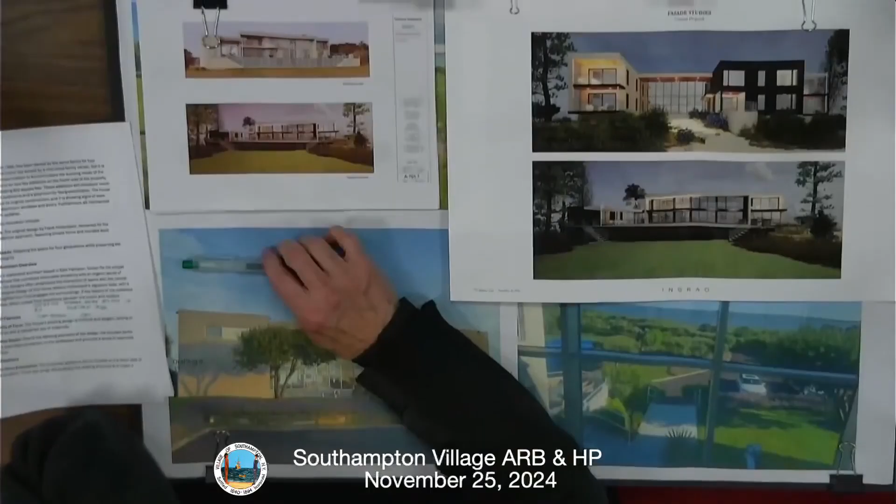My family has owned this house for 37 years. I grew up there with my parents, my brother. I now have 3 children. I'm a grandmother, and we are renovating the house to accommodate 2 more bedrooms, so I have room for the grandchildren. Here with Tom Pedrazi, my architect, and Steve Naroda, my landscaper, and we can give you a full presentation on what we're doing.

We are keeping the house exactly the way it is, except just expanding in 2 areas. And I hope you like it. I think we took a tremendous amount of time and effort to really keep it exactly as much as we possibly could, and I'm really proud of the job we did.

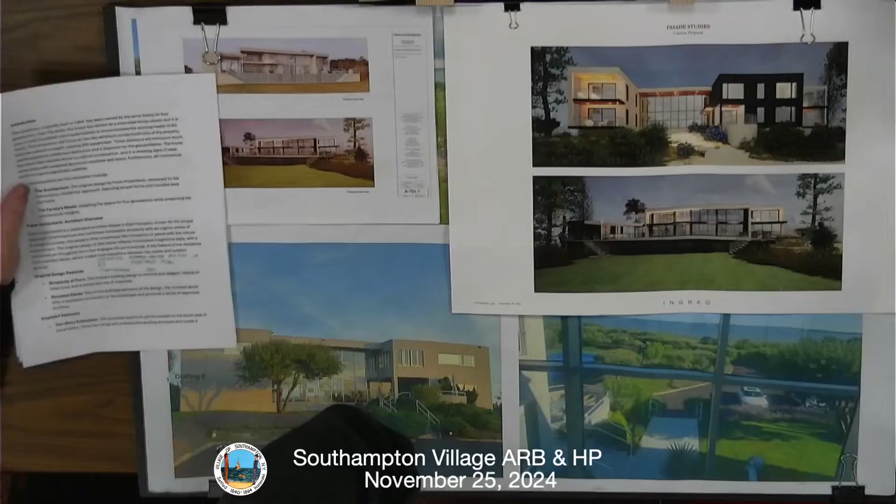Was this house in front of zoning for a while? ZBA, yeah, ZBA. Not for a while, just twice. The other one was. I just remember seeing this house because I watched those zoning meetings. I believe it received special wetlands permits, but did not need variances.

If you want to discuss the wetlands, we watered those wetlands for 10 years, not realizing they were wetlands. That's another whole story. I was looking at it coming out of your driveway today. The driveway beside the wetlands was paved for obvious reasons that I told you earlier, but we're now going to change the driveway to make it permeable, with little stone in it, which is what they wanted, and we're happy to do that.

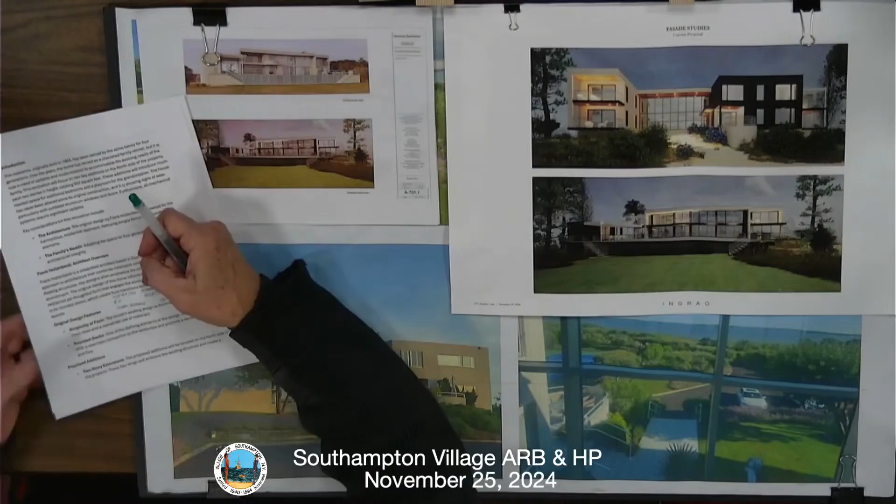I think it's great for the neighborhood too. We have signs all over for the terns, and we're very careful about the terns, we protect them ourselves. I've lived there my whole life, Southampton's in my blood, and my dad was very involved in town politics, saving the beach and saving the birds as well.

Great, so I present Tom and Steve. Oh, look, we have a little model. Okay, go ahead. Tom Pedrazi, architect for the applicant. Could you spell your name? P as in Peter, Edrazzi.

Thank you. Thank you.

Also pronounced Pedrazzi. So, thank you, Leslie, for that introduction.

This residence, originally built in 1984, has been owned by the same family, the Harwoods, for 4 generations. Over the years, the house has served as a cherished family retreat, but now is in need of update and modernization to accommodate the evolving needs of the evolving family.

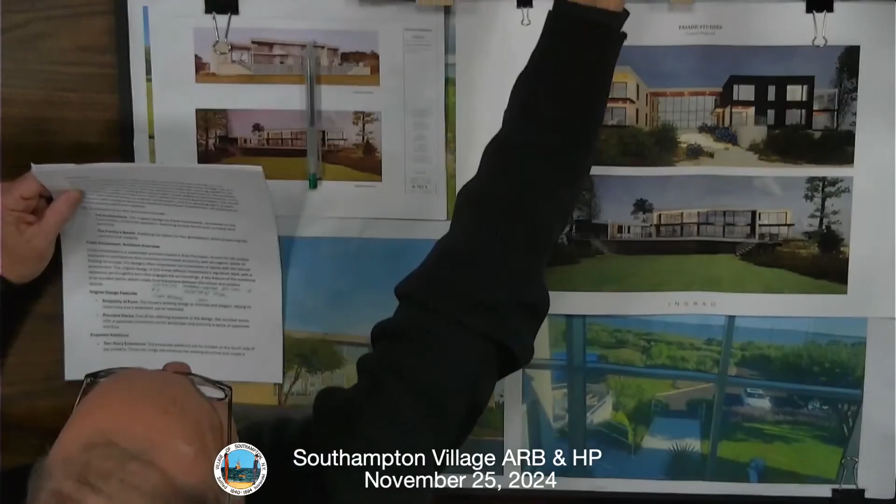The renovation will focus on 2 key additions on the north side of this property. Both of them are 2 stories high. The existing height of the existing building does not go up any higher. We set datums at floor heights, which are 8 feet, floor to ceiling, except for the great room, which is in the middle, in front of this big glass wall. Existing glass wall, which is gonna stay.

Now, I know you're all just dying to hear who the architect was. Frank Hollenbach is a celebrated architect based in East Hampton, known for his unique approach to architecture that combined minimalistic simplicity with an organic sense of floating structure. He was also influenced by the Gwathmey Siegel House in East Hampton, and we found that out today.

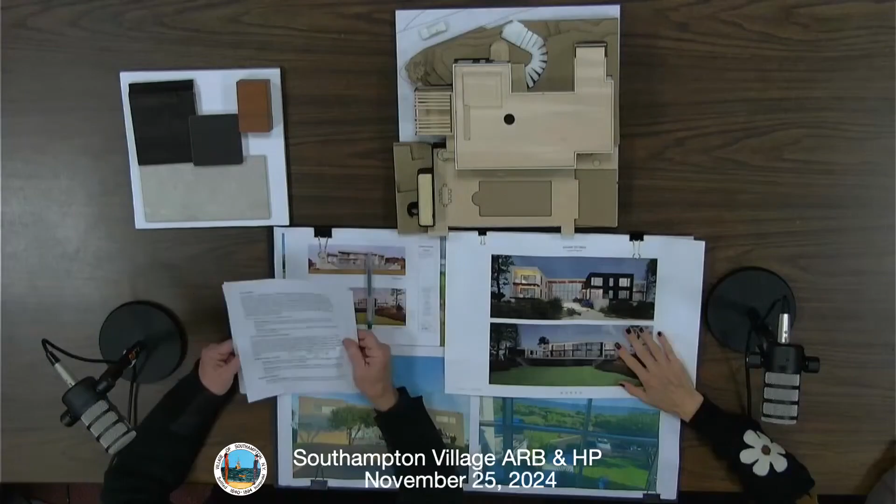Can you hear me? I can. We bought the house from the Locker family. They built it originally for their family. They never moved in. We were the first and only residents in the building. As it has come full circle, Jeff Locker, who was the son of Aaron, who did this house, is now part of the Ingrao design team. And he was with us today talking about the design.

In the interest of time, let's just go to the renderings and walk us through. I can tell you more stories.

So really what happens here is we're just adding 2 wings off to the north side, and we're recladding the entire structure.

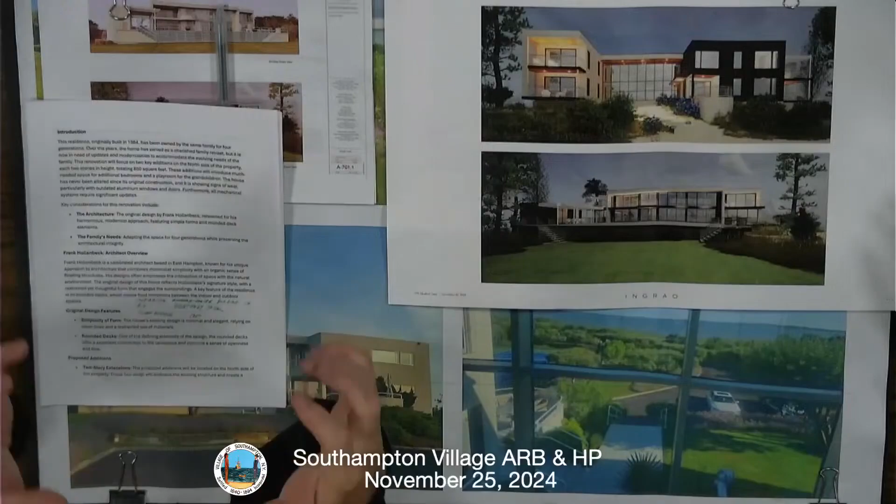So the vocabulary that we started to set up when we started to sort of mass these elements in the structure and meld that with material was one that we felt would be a good product in this environment: porcelain. This is the porcelain sample we're proposing, a stacking bond, 24 by 48, that goes up the house. All of the interior niches are Shou Sugi Ban, a dark brown color. To break up the facade a bit, we add the Shou Sugi Ban to the larger wing.

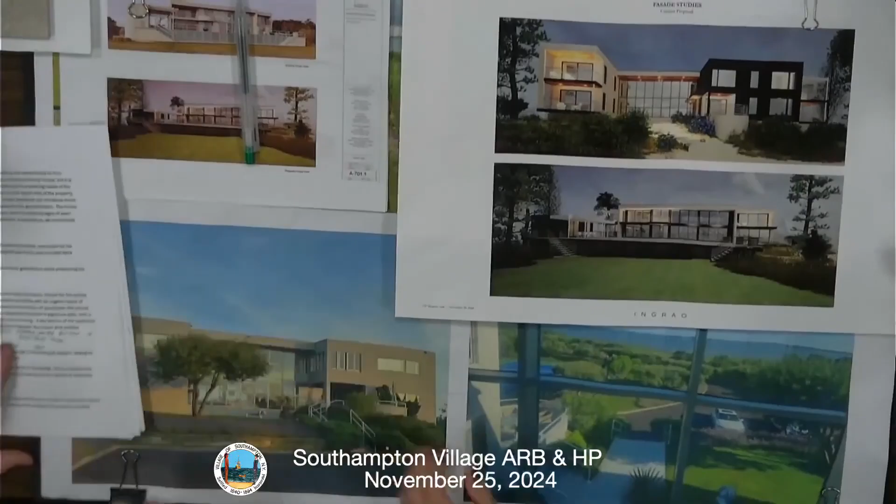You've probably seen the existing house, since you were there visiting. So really, it was just pulling out a wing here and pulling out a wing here. Okay, I'm going to shorten this out here now.

So the two wings you're adding actually head toward the street. You're taking the volume on the left and the right of the large windowed center, and you're extending it, pushing it out toward the street.

Yes, and we're adding balconies on the east side, and it's just going to be bedrooms on the west side. We're also adding an addition, which is an extension of the garage off on the west, and then we're going to do a double-story deck. One has a semi-enclosed space, and the other is completely open to the sky.

The other thing we're adding is a staircase up to a sunset porch, a deck on the top. It still stays within the height regulation because we're about 6 feet underneath what the pyramid or height restrictions allow.

We feel like the recladding will last forever because porcelain is not going anywhere, and Shou Sugi Ban is just as durable and mighty.

Okay, taking it back for a minute. Let's go to the front. So you've got two volumes in the front, and the two volumes are coming forward, on the right and the left-hand side. On the left-hand side, you're adding two stacking balconies. What changes are you making to the east elevation? The east elevation is basically just adding an extension off of that.

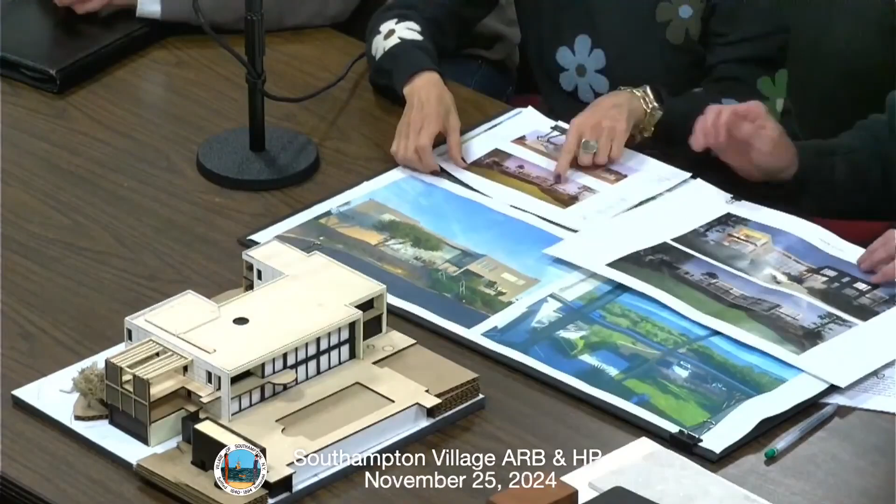Do you have drawings? I brought the model, but the public needs a drawing to see. What are you looking for - a plan or elevations? Let's work from elevations for a second, just so it's clear to everybody and faster.

Okay, so we're going to go to the west elevation. Here's what I'm going to do, Lisa - I'll give you mine because it's bigger. No, I got it, Lisa, stick with yours, go from here since these elevations are bigger and the camera will be able to see them. And I'll share with you - the model looks good on the screen.

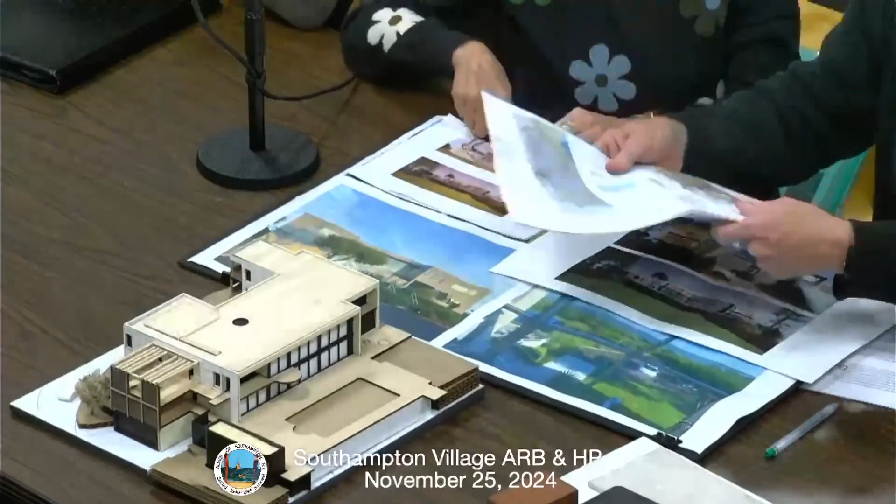Can I just show you in this picture - this is what we have at the present time, and this is what it's going to be. Also, this is the front of the house. What I need you to do is just take me through the elevation so it's clear to everybody.

We're going to start on the west side. On the west side, this area right here is the extension, just this area. This is all just recladding. This portion goes to the north, so this is the extension. But on this facade, it's just this garage extension and two double-decker porches.

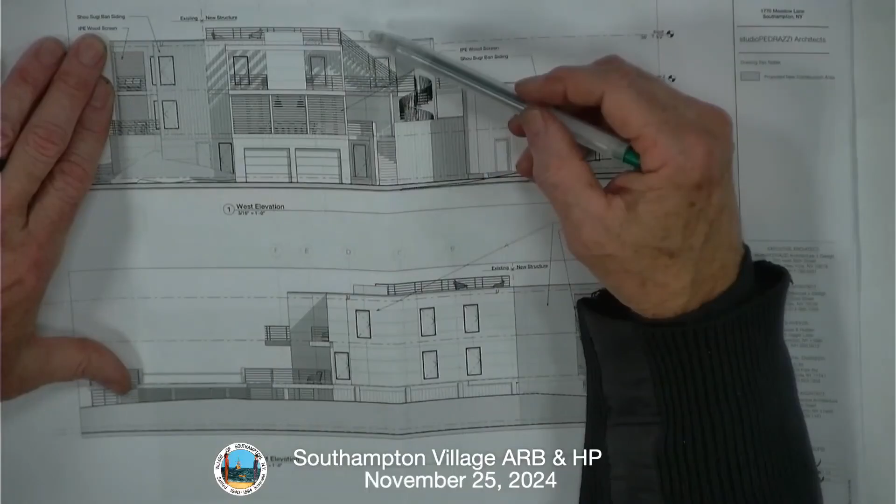That's an extension - that garage does not currently exist. The garage is underneath the house, tucked underneath, so there's a flat facade there. Basically it tucks underneath the house, and we're pulling that garage out from the underside. So the garage doesn't exist right now, that's an extension, clad in porcelain.

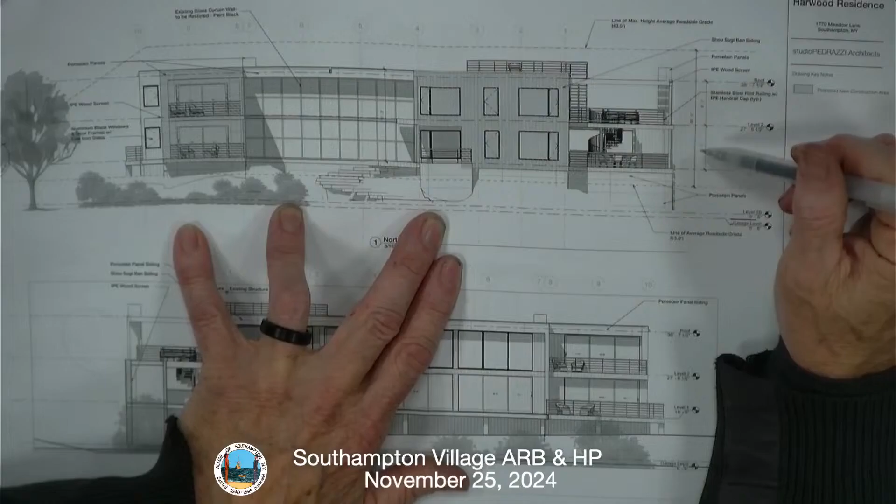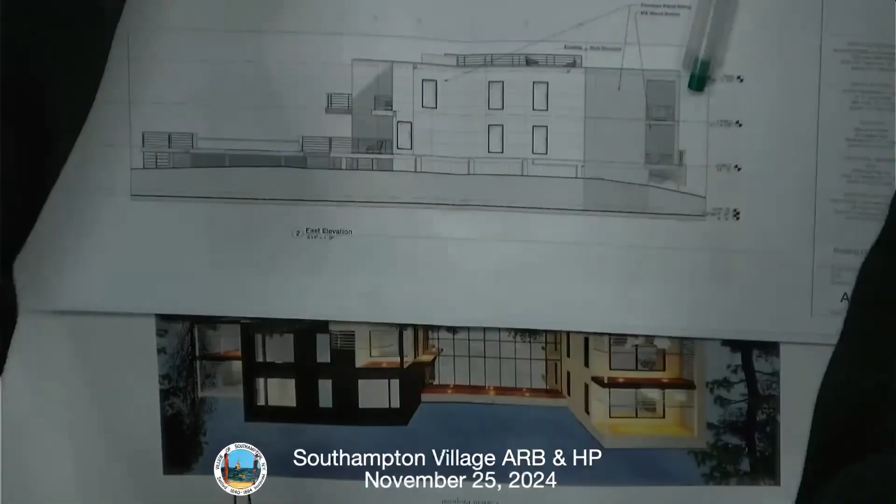On the south side, it's only the extensions you're going to be seeing. On the west side, everything else stays the same, just reclad with new fenestration. On the east elevation, it's being reclad, and we're adding windows because there actually are windows already but not as many on this facade. Also to note, this is a pre-existing non-conforming setback.

We actually had to step that back to get our setback, which prevented us from just running this straight to the north. That actually created a nice little corner bay which also has windows in it - those two windows are right here.

No, we can't see it, it's not on the screen. Okay, yeah, I think that would be good - could we go to this plan? I think it shows a little better. Yeah, because I'm confused, and I've gone through these plans.

It's your house, just outline where the differences are. We're just trying to figure out exactly what you're building. So you see right here, this is what is existing. This dark gray is an extension that's going to be a bedroom, and this dark gray area is also an extension of the bedroom. This is the porch coming out of the side, which will be a porch with a new garage underneath.

The other thing that's new are the stairs. So the only actual new construction is the front and that garage - these two pieces here, this box here, this porch and the garage underneath it. The rest is just recladding what already exists.

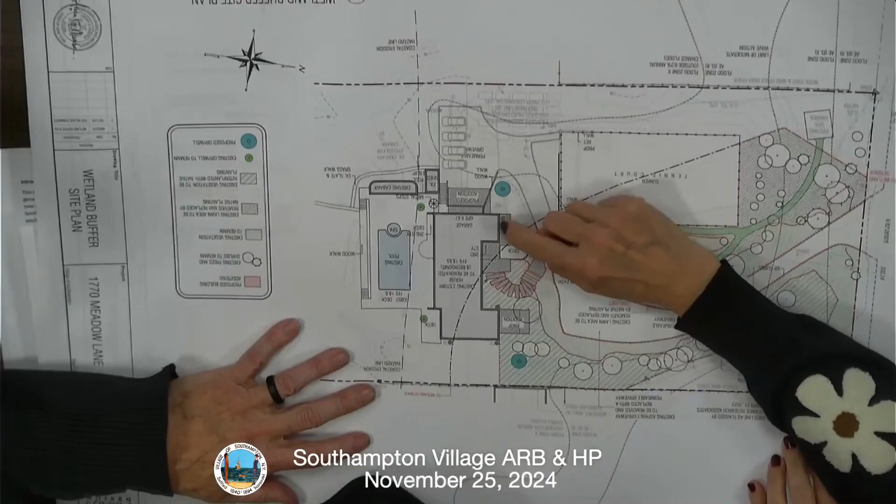Are you changing any of the balcony depths, widths, or railings across the back? No, that all stays the same - the pool deck, the pool railing, the upper balcony, all the same. There's two balconies that face front and back, exactly the same, nothing's changing. So really you're only adding two bedrooms - one here, there's a little bedroom, we're extending this wall to make it a little larger, and we're adding a bedroom here, upstairs and down. Got it, and that's it.

All right, board members, questions, comments? Thanks for that clarification, that helped a lot because I love the model, I haven't seen one in so long.

Models are fun. The camera just sees the roof, but with the model you see - oh, what have I been missing back here? They were able to film it at an angle, Mark.

But I think the interesting thing also is this little jut out here, this is a bedroom, so we're just making it a little bigger, so it's a little more comfortable. And this will be a bedroom upstairs and then a bedroom down. So these are the two bedrooms being added, and this is just increasing the size of that. And that's it.

My only concern is, and I'm not familiar with the material, the shou sugi ban. You say it perfectly - shou sugi ban. We have a spot for that. We shouldn't talk about that right now, but we can talk about my facade right now.

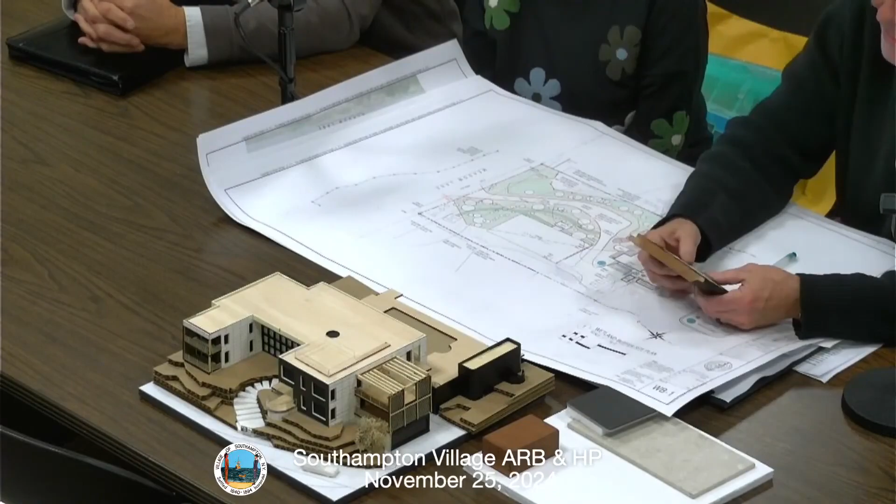So the shou sugi ban is a process by which the Japanese created - it's actually a burnt wood, and then it's sort of treated. They sand it, and then they treat it, so it actually petrifies the wood and gives it a nice grain. You can get darker, you can get lighter, you can pickle it.

Can we make it a little lighter? That was going to be my concern - it looks so black from up here that I was thinking it might just look too black and white from the street. That was my only concern.

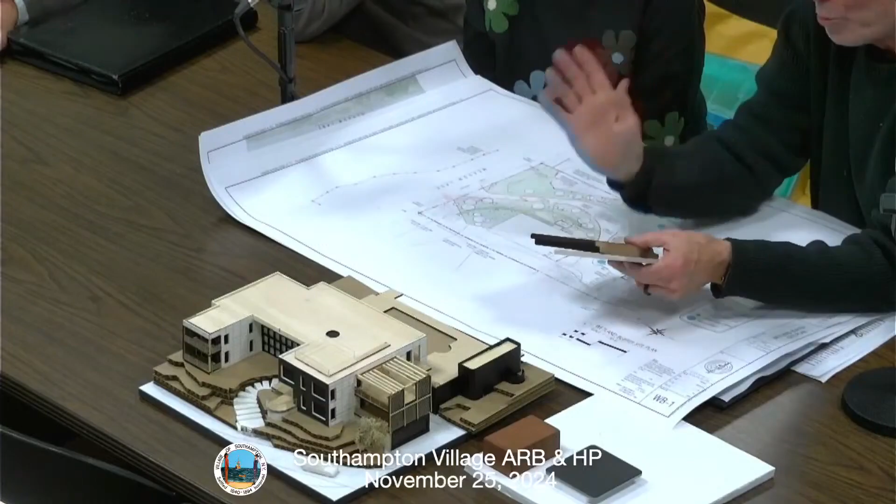Other than that, I think your plan sounds great. I mean, I would never say black, it's a dark brown, and maybe you're just not getting the right angle. Well, from looking at your model it just seems such a stark difference from the porcelain, which I love the porcelain concept. But isn't that the idea, to have the contrast?

I don't know, it just seems - we didn't want to go black, there's burnt black, it's just black. Actually, there's ones that have the same burning texture to it, and that's very popular. Well, I think what you're doing is minimal, and I don't have an issue with what you're doing. That was my only concern, and I wanted to ask about the shou sugi ban because we do have that spot here.

So now I got more educated. Hopefully it opens again - it will. Nina? Oh yeah, I feel so bad for them. Because I don't know if you recognize me, but I'm a neighbor. Nina, do you have comments? Can't hear you, are you on mute?

Shou sugi ban is great, it's the proportions, it's very massive. I'm sorry, say that one more time? Massive proportions, nice proportions, okay.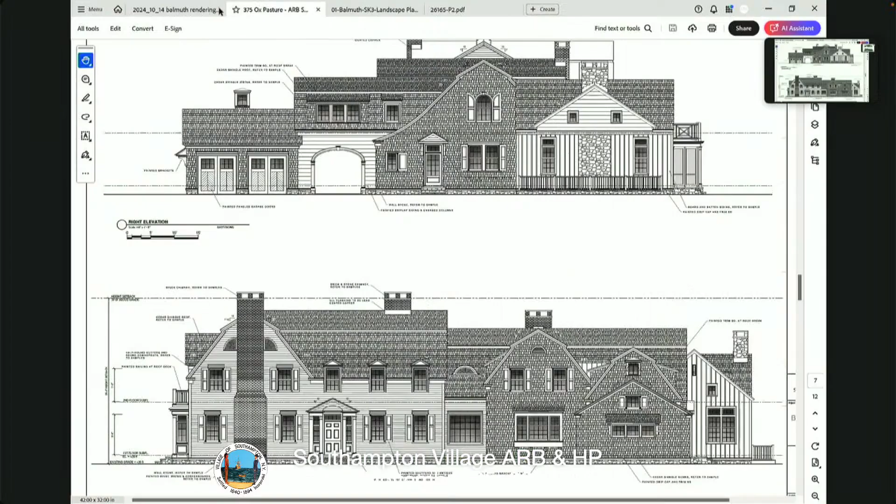What about the shutter materials? The shutter is a traditional wood shutter with classic hardware. And the window colors? The windows are white. And the mullions and muntins? All white. Everything's white, okay.

For all this fieldstone, the idea is to paint it—to lime wash it. There are really only a few areas of it. The base of the house will have stone on it, but the intention is not to have to lime wash all of that.

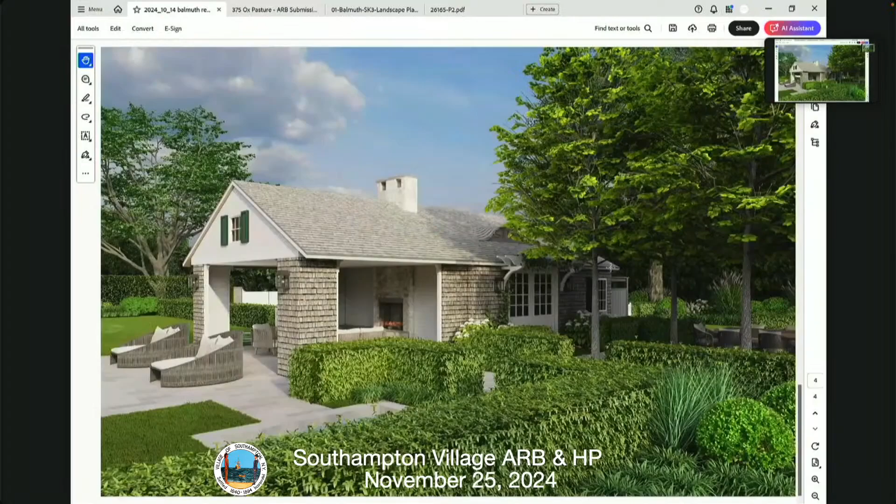There's only one exposed chimney, stone in the barn room, with an exposed outside surface, so I didn't have to bring the mass of that chimney all the way down on the east side—building it into the wall thickens that wall up. There's also a stone chimney on the pool house, mostly undercover, and a little bit of stone on the back of the house on the first floor guest room. So there's not a tremendous amount of stone exposed, but to keep it in the painted look of the aged brick, we proposed doing it as a lime wash.

The samples are right there—if you put those on the table, we can pick them up on the camera. You can't pick them up. It's okay, don't pick those up. We can see them. Stop—don't hurt yourself. All right, and then maybe overkill, but...

Okay, board members, questions, comments? Do you want to take us through the landscape plan? Sure, Michael could address that.

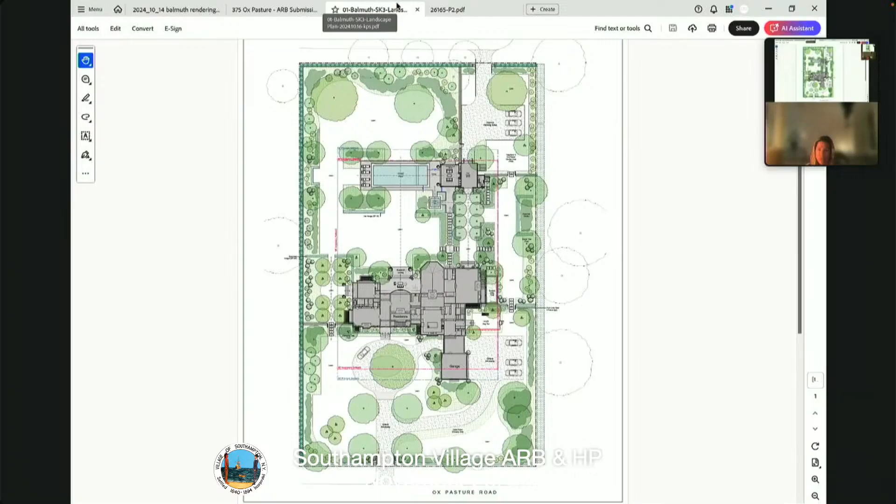We have a small amount of landscaping. The owner was very big on not having a privet hedge, a wall across the front of the house. So she wants pockets of plantings with various heights along the property line on Ox Pasture, so you can get views into the house. She's very against privet hedges and stuff like that.

That'll save them a lot of money. Yeah, exactly, people against privet save a lot of money. I'm gonna have to be okay with that, and let that one go. Yeah, as long as the alternative isn't Jolly Green Giant. Exactly, yeah, we have plenty of them on the neighboring property, which actually worked well for us.

But it really is quite a simple landscape, as you can see. It has flowering trees and shade trees. We haven't gotten into the specifics, but the larger circles mean shade trees, the smaller circles mean ornamental trees such as cherries, Japanese maples, crepe myrtles, and magnolia trees.

On the west side of the house, we have a garden outside the library area, which has a gravel path that brings you through into the backyard.

For the pool orientation, after the ZBA meeting we changed the orientation and brought it in. It sits in the middle of the property because we had to have such a large setback from Merrily Drive.

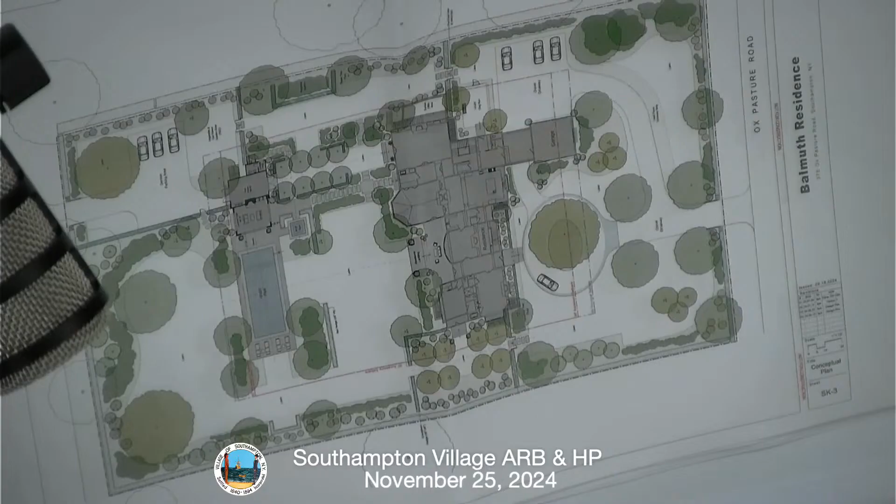I really like the mixed materials and the fact that it doesn't look like it was just built yesterday, that it looks like it's been around for a while. Obviously a lot of thought and effort went into that. I wasn't so sure about the stone, but since it's lime washed like that, I don't mind it. I really like the brick. I wasn't sure at first if I'd like all the different siding elements, but I think it works.

I'm sort of overwhelmed by it because I had to work on the other part of it. I'm just amazed that there's anything built, and able to be built, by the way. I think they did a good job being fairly respectful of the setbacks, because it's tight and this is a big house. The stone is not what I'd usually expect, since I always think if you want stone you have to drive to Connecticut or Rhode Island, but I actually like it on this house, and it breaks things up. I think the breaking up of the space, which is pretty big, is successful, and the color palette is certainly successful. So, I like it.

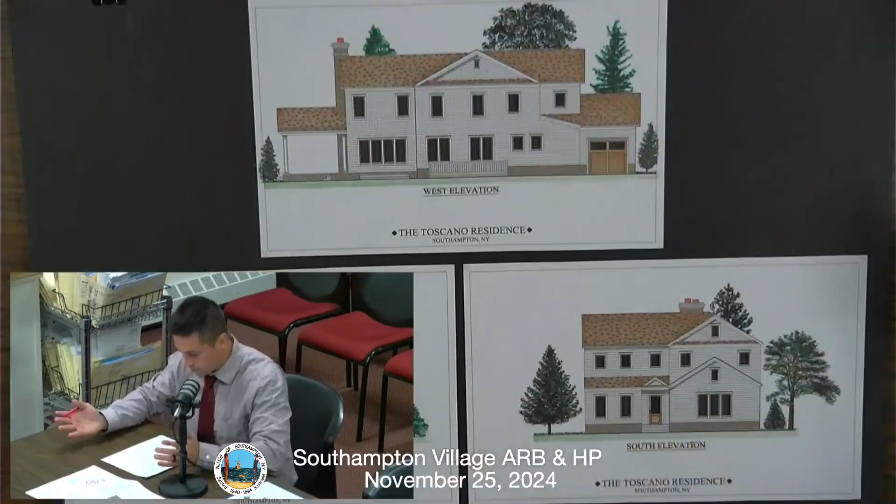Okay, I have the renderings here, let me zoom in on them. Tonight we're proposing a new 3,490 square foot residence that contains 5 bedrooms and 5.5 bathrooms. The shingle style home we are proposing will have a rear covered porch with 10-inch square HB&G or Chadsworth style columns. The exterior siding will consist of a perfection wood cedar shingle with a 5.5-inch exposure and woven corners.

The base of the residence will have a brick veneer water table as opposed to exposed concrete. If we could get that on screen for Nina, that would be great. Go ahead. The brick color will be a Glengarry and white Lorraine. The windows will be an Andersen A-Series, a casement window with a 2x2 muntin bar and Andersen's pre-manufactured color in dove gray.

The trim, 4.5-inch wood trim, will also be white, matching the exterior cedar shingles. The frieze boards and rake boards will also have a white wood trim. I also have a material board for some of this, after we get the renderings up. The front entry door we are proposing is a Therma-Tru shaker-style door with also a 2x2 mullion bar to match the casement windows. The roofing will be a natural cedar shake roof, and we are also proposing a 280 square foot pool cabana with an attached trellis that will also match the styling of the residence. There's also a proposed in-ground swimming pool that is 18 by 36.

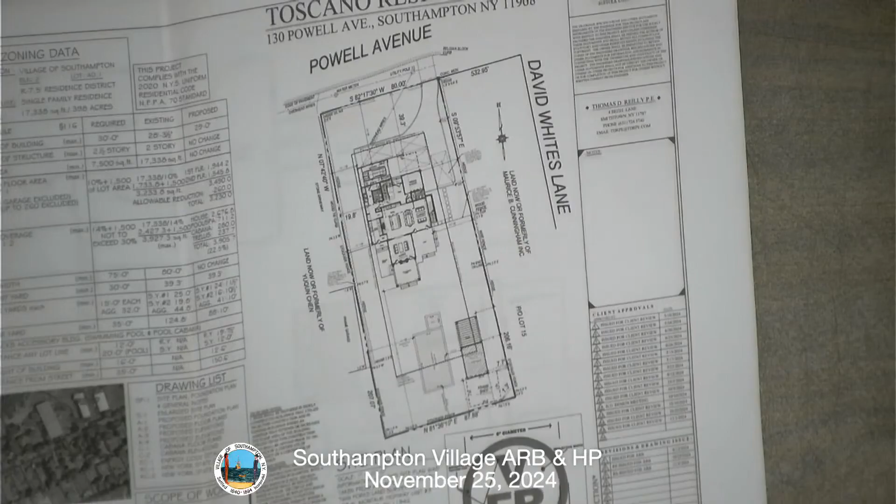And let me bring the material boards. Do you want to see the renderings first before I flip over to those? Yeah, we're interested in the structure.

And it's white painted, is that correct? It's, yes, a Maibec white, usually double dipped from the factory, a white shingle. White cedar shingle, yeah, natural wood cedar roof. It's a pretty traditional looking Hampton shingle style home. The garage door will also be mahogany in color to match the front door, so it'll bring in a little bit of that wood element to the white facade.

The property is very elongated, so we tried to use the length. Same thing with the swimming pool and the pool cabana, since it is an elongated piece of property, we tried to work around that. There was a previous application last year for 130 Powell, but it was more of a colonial style home, so we took your recommendation to stretch out the house.

I do have that. What's upside down? These are all the proposed materials and kind of references, the color palette.

Can we see the other side again? Yeah, sure, because we don't have those in our packet. So it's hard to see it - you're showing us the black image, the windows. If you want to see it, it's very light, I'm sorry about that on the rendering. It's okay, but it's all just the dark poche kind of covers it - it's just hard to see with the camera, I guess.

And that does look like a different door there. Yes, the window looks bigger on that door. So that has the mullion in it too. Yeah, this is the actual product. So it's kind of - I would almost call it, instead of a half light, almost in between a 3/4 and half.

That shaker style looks different than the door on the other side - that's a 4-panel door. Is the door you're proposing not that door? No, it is this door, with 4 panels. 4 lights? Yes.

That rendering - you can't see the separation due to the marker. Oh, were those color renderings submitted as part of the file? No, not yet. We're gonna need the digital copies of those, and hard copies for the building.

My only concern is that your garage door is right up against the front door piece. You pulled into the garage right here, and then the front entry is - there's no setback from the front entry to where the garage door is on the house, which is architecturally odd. It doesn't set back from the front entry - the width of your entry is the garage door.

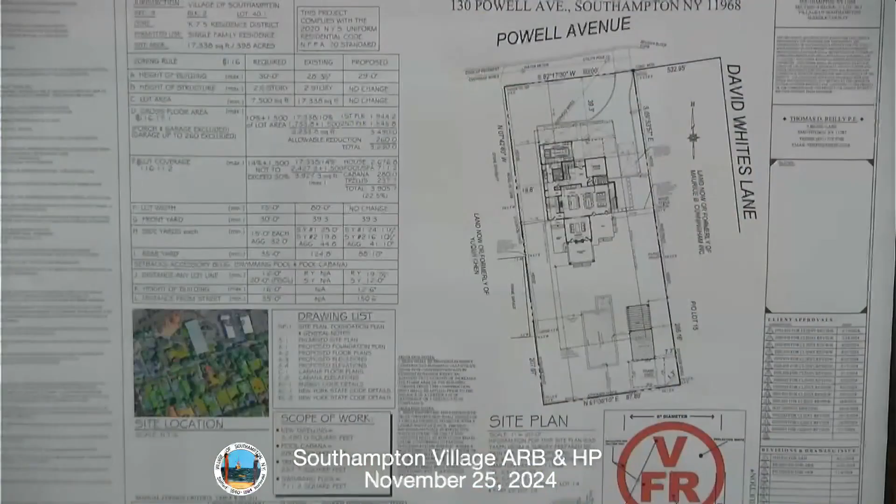I think it's visually odd. Now the question becomes, with the depth of the garage you have in there, do you have enough room to shorten that up and give yourself a little breathing room? Because your garage is 20 feet 6 inches. What's your minimum depth of a garage? It's a 12 by 20 interior garage. It's tight.

I just think that when your garage door slams up against your front door, it's visually odd and atypical of Southampton. I don't know that it's harmonious with the rest of that neighborhood. For the most part, I think the work you're doing, the rhythm, your choices are good. That's the one thing that, if you actually see it, it's a mistake. It'll look like a mistake.

This is the side yard setback. We could slide it maybe 2 feet to the side yard. My suggestion would be that you take another look at that, just because I think that's visually odd.

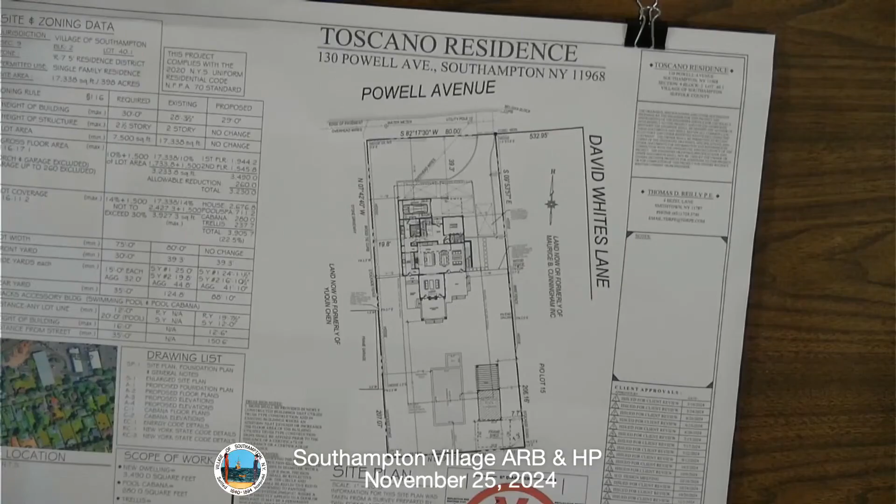Do you have any recommendations in terms of that? We don't, no, we don't do design, we just comment on them. That's the rule here. You wouldn't want to listen to it anyway. Don't go there. Your site plan shows a driveway gate, are there plans for a driveway gate? No, I didn't see elevations for that.

Nina, any comments? There's an enlarged site plan that was provided showing where the garage door is next to the front door. Nina, do you see what I'm talking about? She can't see any of it, she can't see this. Does she not get the plans? Maybe it's in the Dropbox. You could probably zoom in.

Are there any comments from the public? No. Okay, it's Lisa's work. I think what you're hearing is that for the most part people are finding your materials nice, they like the veneer setting. The one thing that bugged people is that the way the garage is set into the house is odd.

Is there a way to get into the garage another way? Too tight, I don't know if they could come back this way, it's just that wall on the house. You can't do it, right? It's all jammed in there. It needs either a setback or a break or something to make it feel more sophisticated, and they need to rethink the parking arrangement.

Okay, all right, so do you think you can come back? Think about that and come back by December 9th? Yeah, I think so. Okay. So, motion to accept the applicant's request for an adjournment to December 9th.

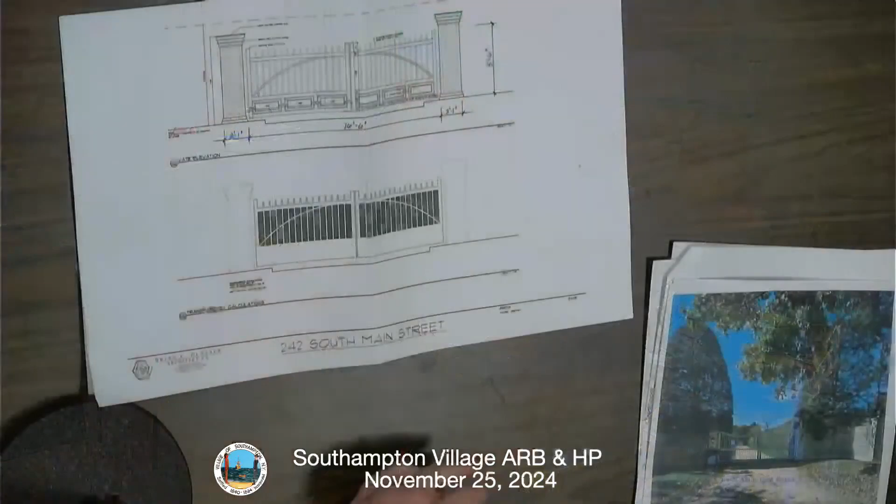Well it has, oh, it's this house. We can work on this house forever. All right, take us through the materials and the height and the dimensions. All right, I'll leave this here. Okay, why not pull one closer.

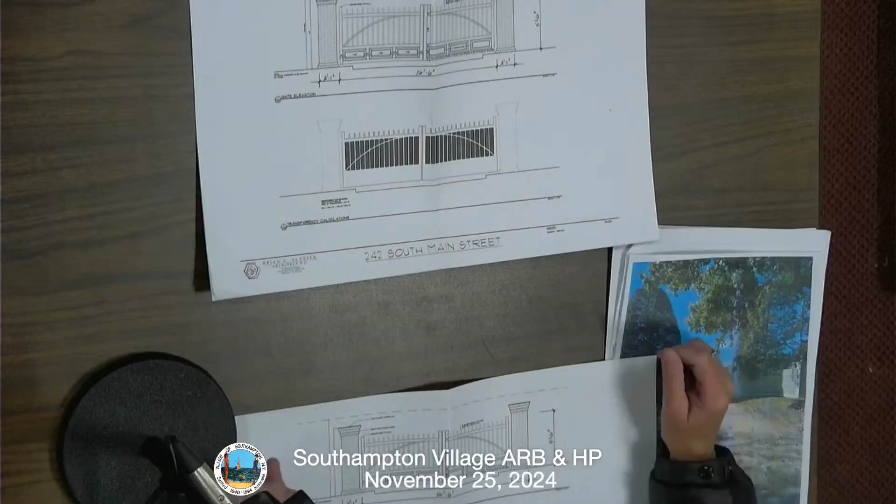So we have a proposed gate on South Main Street. It's proposed to be 18 feet off of the street. The brick piers on either side are 7 feet high, 2 foot 1 inch by 2 foot 1 inch square, painted white. The gate is 3/4 inch square pickets, also painted white, the same white as the trim of the house. You can see the lower panels on the bottom with a little cove detail. The actual gate part, to the highest point, is 5.5 feet high, and you can see below the 40% open area.

Also included in the package were many pictures, it's right across the street from all that spindle fence, so I think it's right in keeping with the character.

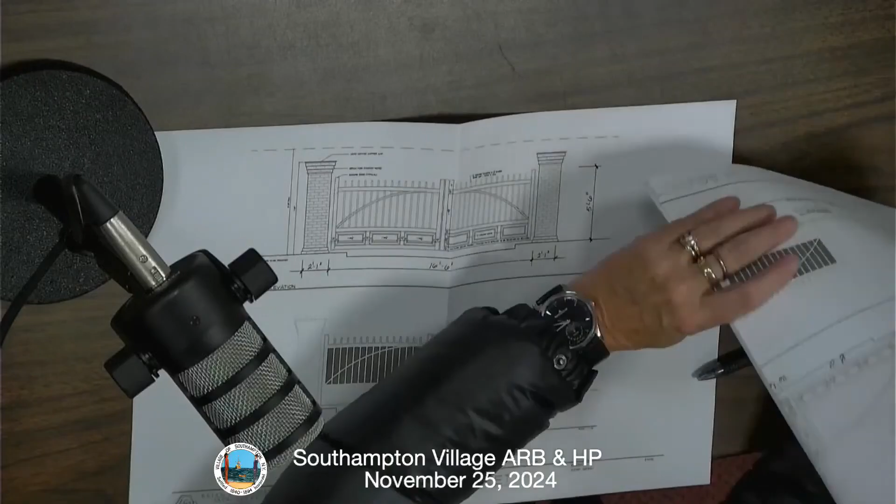What size is the lot? I don't know, I don't have the survey with me. Do you have the survey? I don't have the survey. Let me just go to square footage. It's pretty big, 'cause the house is big. I just want it on the record that... and we're not gonna get it. Okay, well, we will just hang on.

Are the dimensions on here? I know, but anything on there will tell me that it's more than 40,000 square feet. Up there, no? No, those are all the plants. Oh sorry. All right, well I can promise you it's more than 40,000 square feet. You want me to look? We don't have a thing to look at, there's no measurement. We don't have a survey, a landscape, we don't have a survey.

Historic district, is it 40% transparent? Oh yeah, yes, huge. Yeah, here you can sort of see. Oh okay, because looking at this, it doesn't seem that transparent.

Well, that's somebody else's gate. I thought we were on 242. Yeah, we are, but that's just the neighbor's gate, she put pictures of other gates in the area. Okay, sorry. This is the current picture of the property now, there's no gate. I did see that, Nina, I did see that. I know, it took me a minute too.